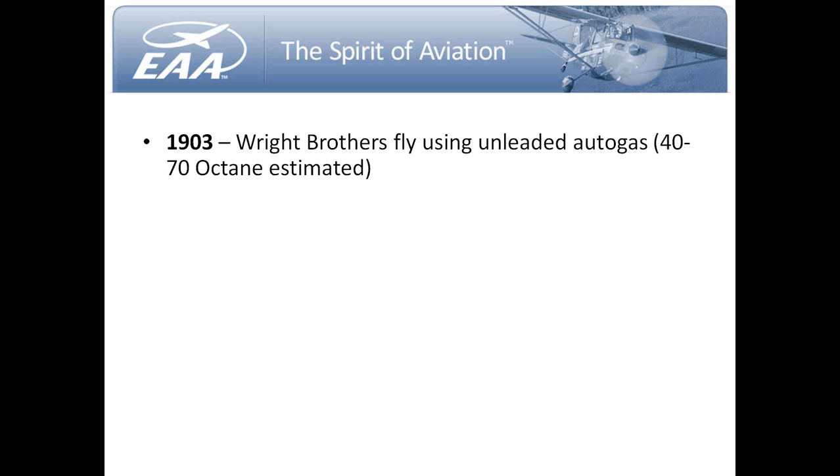And there was no such thing as an octane rating scale then. So we have to take a guess or a wag at what we think the properties of the gasoline were back then in 1903. And it was probably anywhere from a 40 to a 70 octane. But it was certainly a far cry from what we're accustomed to. As we move forward in time, 1917, the U.S. Army adopted the first aviation gasoline specification as we know it. It was a mil spec, and it was called fighting grade.

Later on in 1921, tetraethyl lead was discovered by General Motors, and that really began the transition to the type of fuels that we know today. In 1930, the U.S. Army Air Corps adopted the first leaded AvGas, and just by point of reference, that gasoline contained 3 milliliters per gallon of tetraethyl lead. And today, our 100 low lead contains about 2 milliliters. So they really weren't too far off. And that was when we began to approach the 100 octane levels that we're accustomed to today.

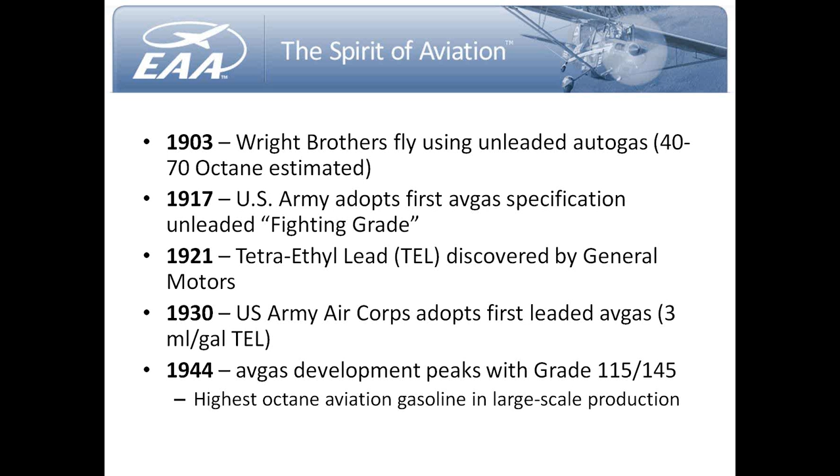Aviation gasoline reached really the pinnacle of its development toward the end of World War II in 1944 with the introduction of the 115-145 grade. This was the highest octane aviation gasoline ever produced in a large-scale sense, and really it's what allowed us to also reach the zenith of piston air-cooled engine development. So as we made our way from 1903 to 1944, 1945, as aviation gasoline progressed in its capabilities in octane, so too did that enable the development of ever higher horsepower aircraft engines. So it's very important to note that all of our engines and our technologies have been driven by advancements in fuel.

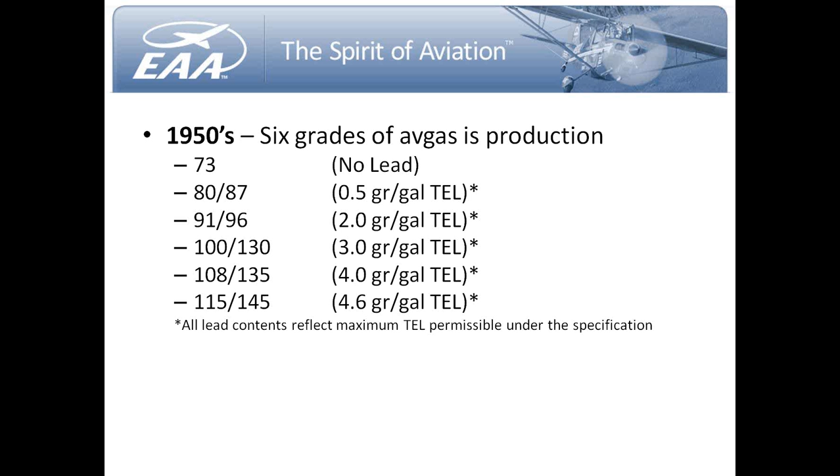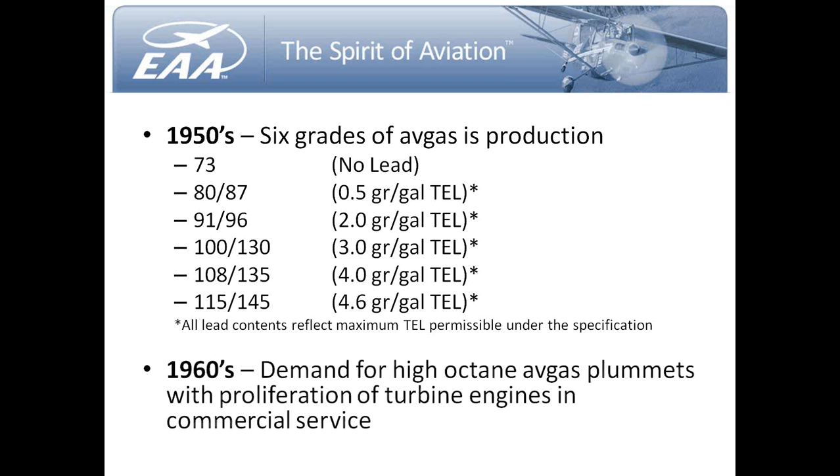By the 1960s, demand for high-octane AvGas really began to plummet, and obviously that was with the development and implementation of turbine engines in commercial service. Also coinciding with that same time frame, general aviation manufacturers of piston engines began to put out service instructions that limited the use of the highest octane, highest lead content aviation gasolines in the lower compression engines. And this was due to lead fouling of the plugs and things like valve sticking and wear. So they began to see problems with some of our lower octane, lower compression engines with these high lead content fuels.

In 1970, this was a seminal moment. The Clean Air Act was signed into law by Congress, and this was really the first time that lead became a target of environmental activity.

And clearly from that point forward, we've seen lead being eradicated from virtually all facets of life in this country and really worldwide. And of course, aviation gasoline was in the sights, but we managed to go quite a long time without any specific regulation.

In 1971, as a result of both the Clean Air Act and the troubles that we were having from a service standpoint throughout the 60s with the high lead fuels in low-octane engines, all of the highest octane grades of AvGas were consolidated down to a single AvGas we know today as 100 low lead. And as I said earlier, that contained a maximum of about 2 grams per gallon of tetraethyl lead.

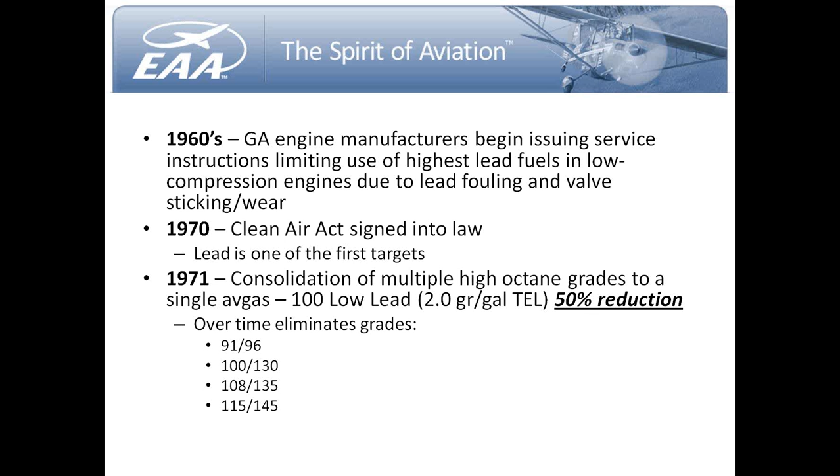This was beneficial, obviously, from a production and distribution standpoint. We were taking these multiple grades and bringing them down to one. It also had the benefit of dramatically reducing the lead emissions from general aviation aircraft by nearly 50%.

In 1974, EAA began its efforts to gain approval for the use of autogas in type certificated aircraft, and not coincidentally, that coincided with the OPEC oil embargoes. We all remember gas lines and things like that back in the early and mid-70s, and we were at that time really under the belief that we were going to lose our supply of aviation gasoline, and so the ability to tap into the broadest based, most widely available source of gasoline was very, very important strategically and economically for general aviation. So that's what really got that ball rolling.

By 1983, the first STCs were issued for 87-octane autogas, and then in 1988, the first STCs were issued for the 91-octane autogas. And then we had a watershed moment. In 1990, the EPA Clean Air Act amendments were passed by Congress. This was really the moment, the wake-up call for all of us. There was a provision in the language in the bill that would have forced the elimination of lead in all non-road vehicle fuels by 1995.

So in a very short 5-year window, we believed that we were going to lose the aviation gasoline that we had come to know. Fortunately, during the course of our activities here in Washington, to look at the congressional record and work with folks on the Hill, we were able to find a technicality, frankly, in the congressional record that made it clear that aircraft are not non-road vehicles and aircraft are regulated separately. So by virtue of something of a technicality, we were able to show that the 1995 deadline didn't specifically apply to us.

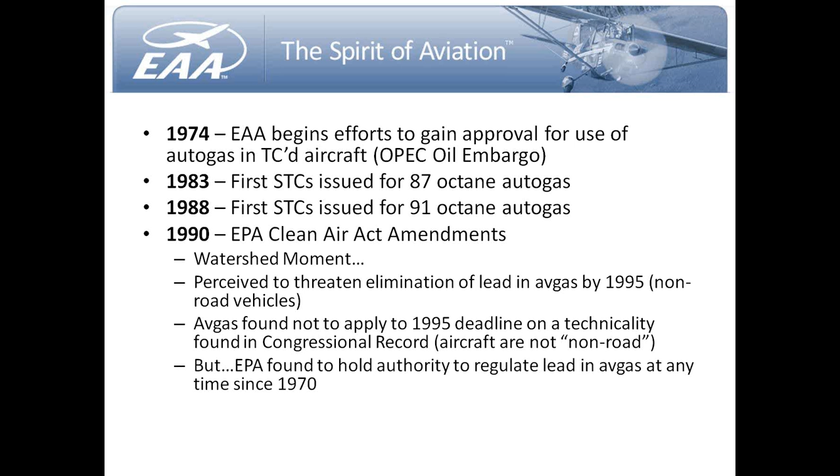However, at the same time, it became clear that the EPA had the authority to regulate lead in avgas at any time since 1970. So it was a good news, bad news story. On the one hand, we got off the hook of the immediate deadline, but the fact remained that at any moment EPA could, in fact, undertake the regulation of lead.

But that seminal moment brought us all together in what was called at the time the Fuel Crisis Conference held here in Washington, D.C. And it was really the first time that all of the parties concerned with avgas came together to discuss the lead issue specifically. And at that meeting were owners and type clubs, owners associations of type clubs, the petroleum refiners and resellers and distributors, as well as engine manufacturers and airframe manufacturers. So really all of us were in the room at the same time for the first time.

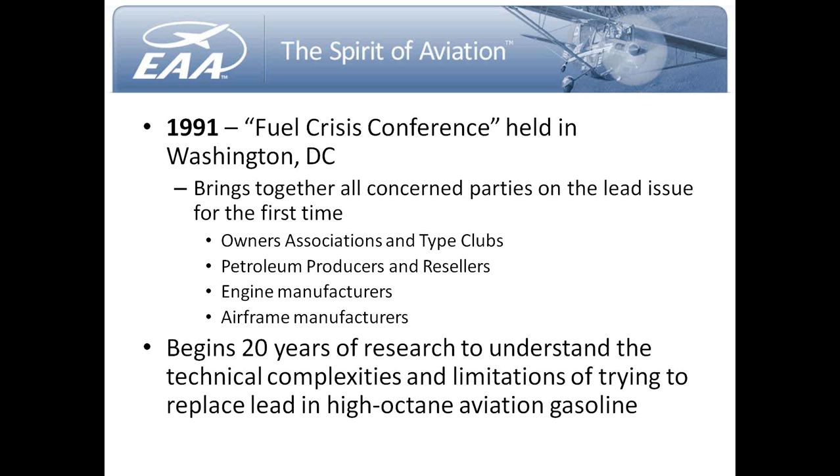And so began, frankly, 20 years of research to understand the technical complexities and the limitations of trying to replace lead in high-octane aviation gasoline. We'll talk more about that as we go along. In 1999, the 82 UL AvGas specification was passed. Now this was a 12-year effort by EAA and some folks out at Cessna to try to develop an aviation-grade aviation gasoline spec that was based on automotive gasoline base stock.

So we viewed this at the time as particularly important because autogas was changing very, very rapidly in the 90s. You were seeing lots of external pressures from environmental concerns and other interests, economic interests, making changes to the specifications. And very notably was the introduction of oxygenates and reformulated gasoline. This really called into question the Autogas STC program that we had. And we were concerned that we really weren't sure how this was going to play out.

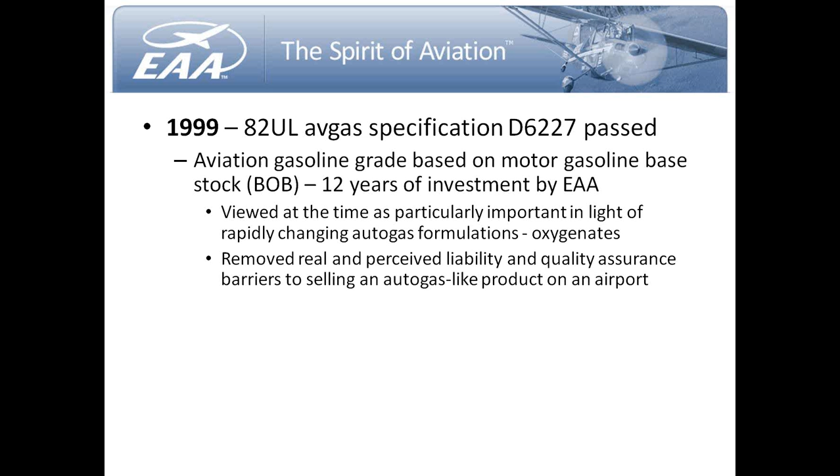So the 82 UL effort was really an effort to freeze the specification, to create an aviation-grade specification based on that massive pool of MoGas that's available out there. And at the same time, it was intended to remove many of the real and perceived concerns that have precluded autogas from being sold broadly at airports, such as liability and quality assurance and some of those things.

This was an AvGas spec, so the idea was this could potentially bring MoGas grade fuel to the airport. And of course it precluded the use of alcohols. And this spec is available today. It's been on the shelf since 1999. Unfortunately, there's been no production or distribution to date, which frankly begs a question in our minds. This is there. It's available to be used. Anybody could make a buck selling this 82UL on airports, but it's not happening.

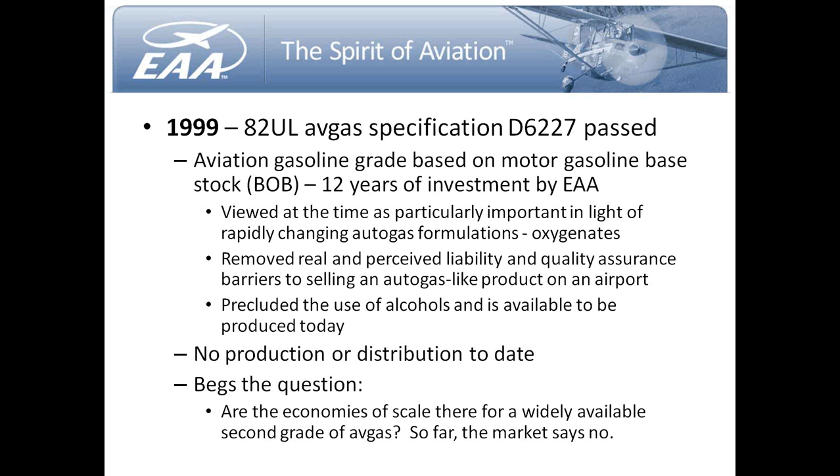So the question becomes then, are the economies of scale there for a widely distributed second grade of AvGas? So far, the market has indicated no. It is a complex issue. There's a variety of factors as to why that's the case, but the reality is we've made it technically possible to do, but the marketplace hasn't adopted it. So right now, external forces are changing virtually everything we know about piston engine aircraft fuel formulation and its availability, and that's what we're all here for tonight, of course.

So clearly, the types of fuel that we use in aviation are two. There's the 100 low-lead high-octane AvGas, and it meets the octane needs of our entire fleet of general aviation aircraft. However, it has some problems of its own. As we've talked about, there are lead fouling problems on the low compression engines, and this is a real problem for the new light sport aircraft category, almost all of which have low compression engines, but many of which also have Rotax engines, and 100 low-lead just simply isn't going to do the job for them.

The other alternative has been MoGas or Autogas. I use the terms interchangeably. In the specification world, it's referred to as MoGas. In our STCs, of course, we call it Autogas. This is a low-octane, relatively automotive gasoline. The octanes range anywhere from 87 to 91, which, when we talk about aviation octane ratings, is equivalent to roughly 82 to 87. Please note the difference there.

It's an important one. We can technically use MoGas in a large percentage of the general aviation fleet. There's no question about that. It does have, however, insufficient octane and a few other properties for some of the high-performance segment of the fleet, which is approximately 30% of the aircraft out there. But admittedly and recognizably, we can burn this fuel in a very large number of aircraft.

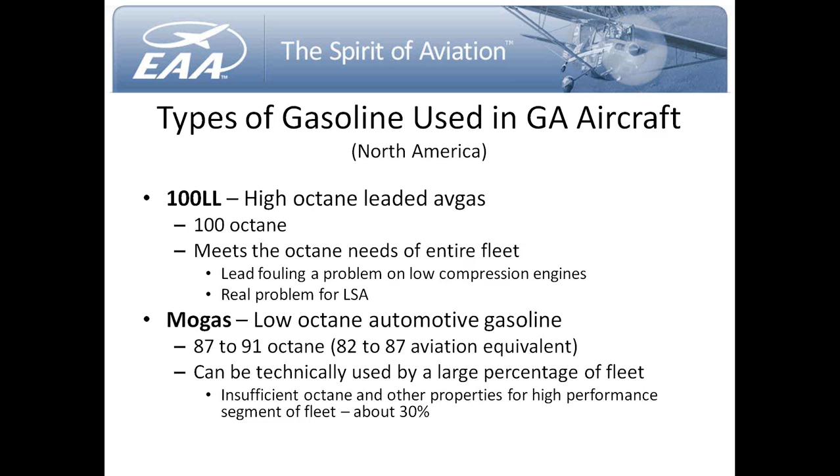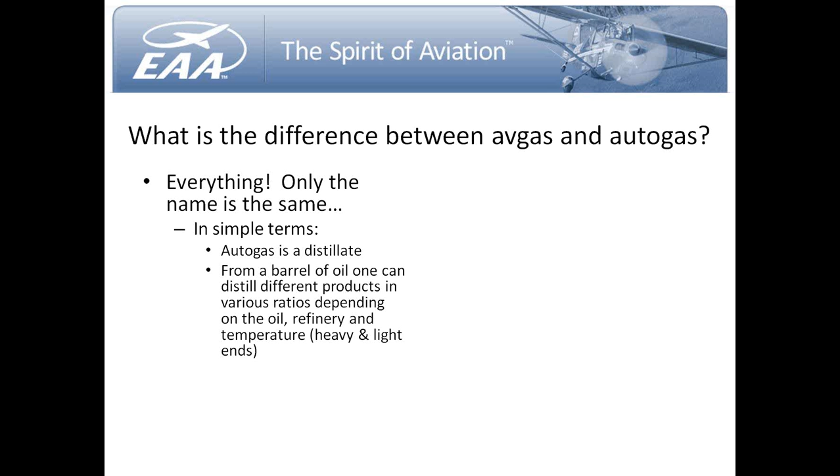So what's the difference between AvGas and Autogas? Well, frankly, everything. Only the term gasoline is the same. In simple terms, Autogas is a distillate. You can take a barrel of oil and boil off different constituents of the oil at different temperatures using different equipment and so forth, but you basically can distill out gasoline. It's a straight distillate.

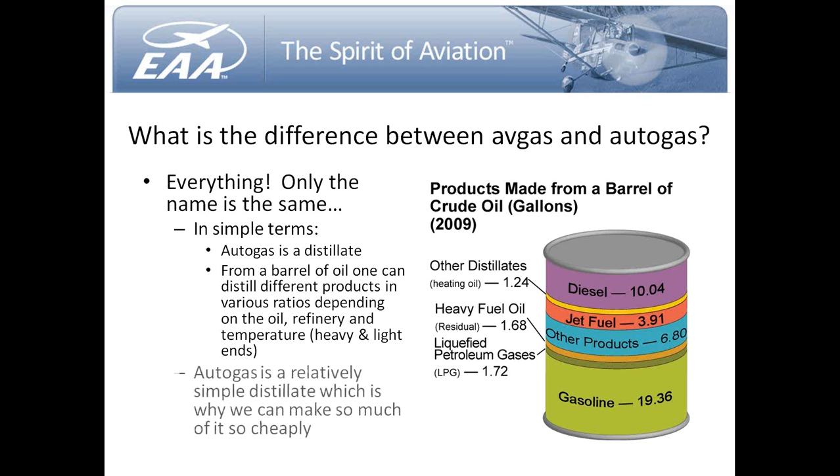So as you can see from the graphic here, if you took the proverbial barrel of oil in 2009, this graphic shows you, in terms of percentages, what portions of a barrel go to what products in North America. And as you can see from the slide, the gasoline makes up by far and away the largest portion of the nationwide annual barrel of oil per se. So that's what makes MoGas relatively simple to make, cheaply and in large quantities. It is a straight distillate.

AvGas, on the other hand, is not a distillate. It is a specialty chemical. It is a blend of specialty chemicals. And isooctane, or reformate, is the basis of it. We call it aviation alkylate. And it goes through some rather exotic processes, hydrocracking and alkylation processes and so forth that we won't go into any great detail on. But the fact of the matter is it's not something you just boil off a barrel of oil. It is a synthetic process that makes a specialty chemical.

You add to that some toluene, and you add some tetraethyl lead, and then to get the lead out of the engine as a scavenger, you throw some ethylene dibromide in, and you've got more or less a simplified version of AvGas.

So what are some of the factors that affect the sustainability of Autogas today? It is readily available.

Hey Doug, now might be a good time to ask that poll question that we had. Oh, good idea. Exactly. In fact, we had put together a couple of questions having to do with what sort of fuels you use, and this will help me as the presenter to know a little bit about you as the audience. So, Charlie, if you would put forth that first question about the types of fuel people burn today. I have already done so. So the question is, do you use Autogas?

And then the answers are yes, no, and I would if I could, meaning I know with all the ethanol laws across the country that a lot of people that might have used it in the past have given up on it.

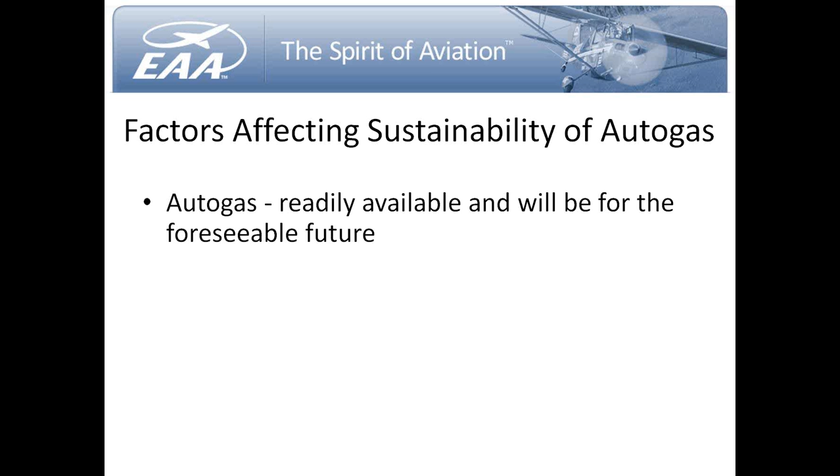However, the threats come from the continual formulation changes that are brought about by a variety of influences, including politics and economics and environmental regulation, and even, frankly, changes in automotive technology. The fuel, when you go to ASTM and look at their specification, it is made for motor vehicles, not airplanes. So the entire universe of on-road, off-road, and highway vehicle manufacturers and consumers are involved in those committees.

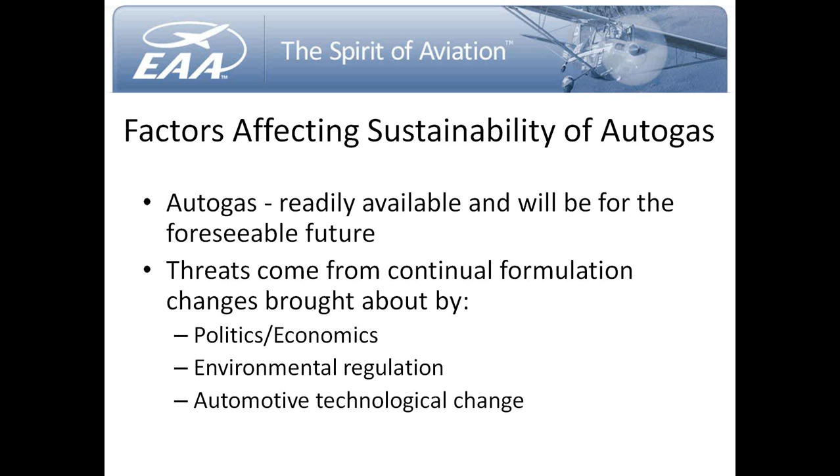And then you've got Aviation, little voice in the corner, who says, yep, me too. So we don't have a lot of influence on this product. And huge forces are at work with a huge pull, and we'll talk more about that. But as the technological changes come about in automobiles, it allows changes in the fuel. Our products are pretty static in their technology, so we can't necessarily change with some of these changes in fuel, at least not readily. And we'll talk a little bit more about that. But a bit of history here.

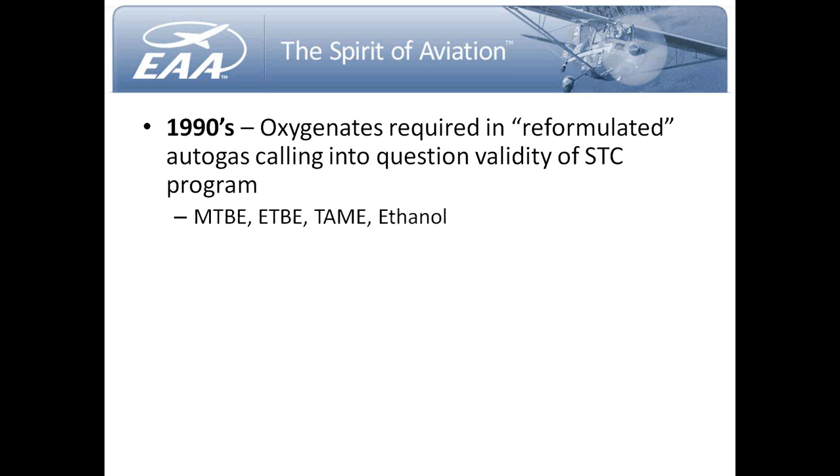As we said earlier, oxygenates were required in the 90s to reformulate the Autogas for environmental reasons, and that brought into question our STC program. These oxygenates were things like ethers, MTBE, ETBE, TAME, and then ethanol, which we all hear a lot about today. We did a lot of research back then to try to figure out whether we could get away with using these ethers and what their impact was on engine performance and materials compatibility.

And we worked very hard with FAA to get that approval, and of course today the STC program does allow the use of ethers. However, ethanol has never been a permissible constituent in any large percentage under the Autogas STC, and it remains prohibited to this day. In 1999, as I referenced earlier, the 82 UL AvGas specification came out again, the object being to freeze the spec for aviation use and not be subject to these ever-changing whims of reformulation.

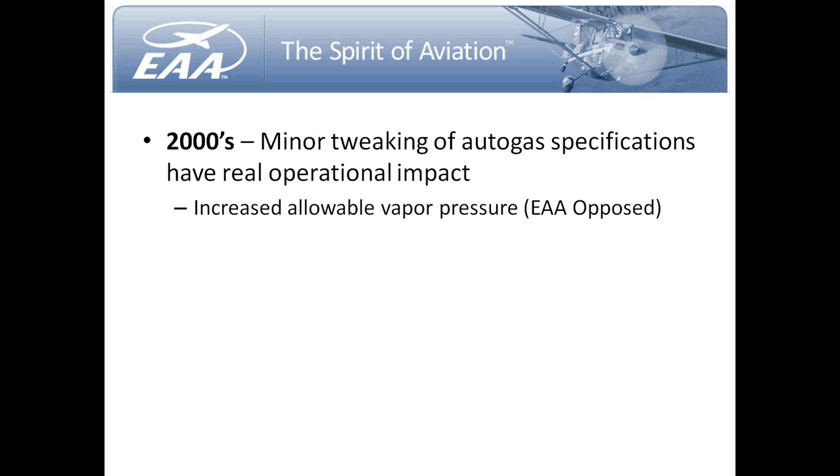Throughout the early part of this decade, we started to see a lot of tweaking of the Autogas specifications that had some real operational impact on our use as aircraft. First of all, there was a move to increase the allowable vapor pressure. For a variety of reasons, this is to the advantage of the petroleum producers, and this poses problems for us in terms of vapor lock. We opposed that at the committees at ASTM, but again, because we're a marginal user and under the spec, actually not even a permitted user of MoGas, we're sort of in the margins. Our voice was very, very small in all of that.

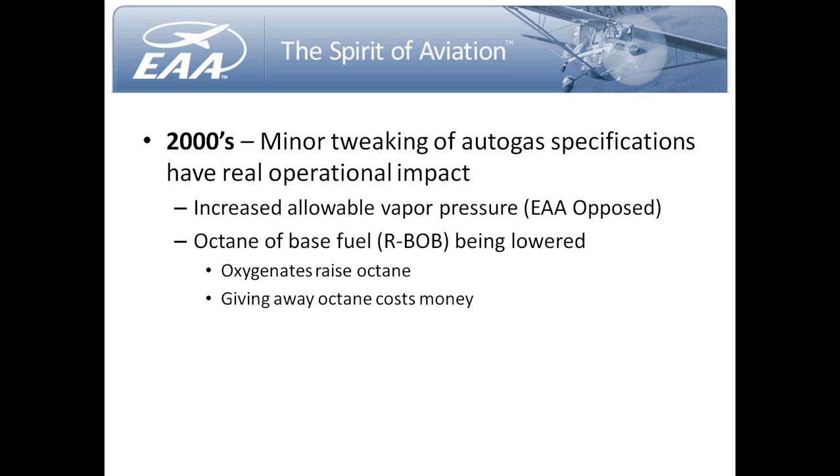One other major concern that's happening today is that the octane of the base fuel, RBOB, which is reformulated BOB, is being lowered. This is a function of the fact that oxygenates, when you add them to the fuel, raise the octane level of Autogas. And when you give away octane, it costs money. So no producer wants to give away octane for free.

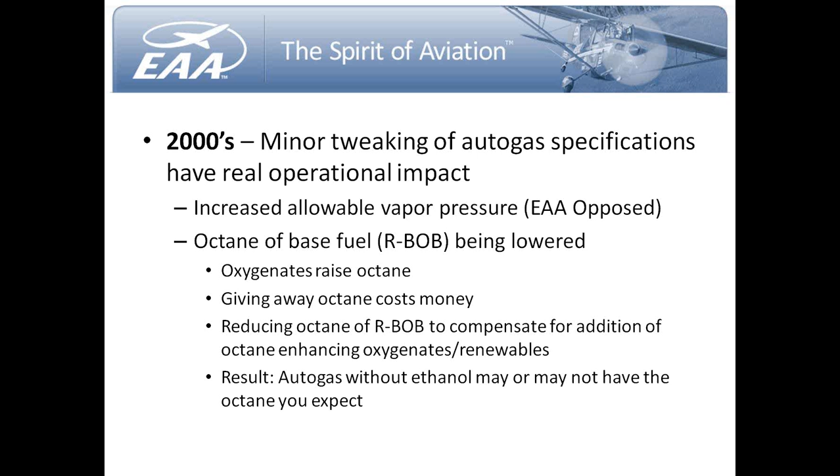So because of the octane-enhancing nature of oxygenates, they're actually setting about reducing the octane of the RBOB, or the basic Autogas, to compensate for the addition of these octane-enhancing oxygenates and renewables. So the result is that without ethanol in the fuel, you may not have the octane you think you have in the basic fuel. And I've heard recently of people washing Autogas, and I'm not sure I can tell you exactly what that means, but if it's removing the ethanol from reformulated gasoline, then what you are left with may in fact not have the octane you think it has, because they've reduced the octane qualities of the BOB.

And then the mother of all changes. In 2005, Congress mandated that ethanol nationwide be consumed in fairly large quantities under the Energy Policy Act. And that's when we really started to see the broad nationwide adoption of E10, or 10% ethanol in our autogas. And once again, this has put the STC program in jeopardy because it's become very, very difficult to find gasoline, autogas that does not have at least 10% ethanol in it.

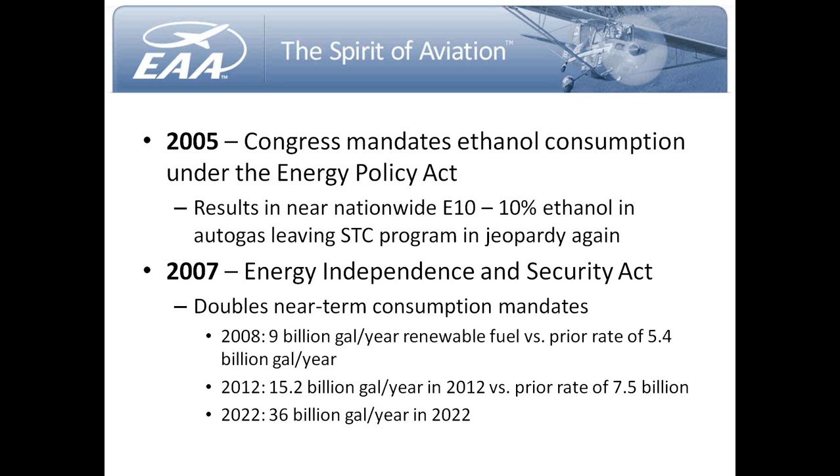And then to make matters worse, in 2007, Congress enacted the Energy Independence and Security Act, which doubled the near-term consumption mandates nationwide for renewables to 9 billion gallons a year in 2008, up to 15 billion in 2012, and 36 billion in 2022. That's all fine and dandy, except that to consume all of this ethanol and other renewables that Congress is mandating, EPA had to figure out how to get it all burned, how to use it all. So just this month, EPA issued a final rule implementing E15, which is 15% ethanol for on-road vehicles produced on or after 2007.

Now this was done in the face of opposition from EAA and everybody. We were, again, a fairly small voice in this, but the worldwide automotive and marine and off-road and non-road engine manufacturing base have all opposed E15. And yet EPA has gone forward with this mandate.

I want to make it clear that EAA has opposed the implementation of ethanol mandates at every turn. We have spent years and years fighting this at a state level before this became a nationwide issue. States were implementing these types of mandates within their own jurisdictions, and we, state legislature by state legislature, were going around the country educating them and trying to, at least, carve out the premium grade of autogas for use in aircraft unadulterated with ethanol or other oxygenates. And we've been partially successful at that on a state-by-state basis, but we were swamped and overcome by the national movement coming out of Congress.

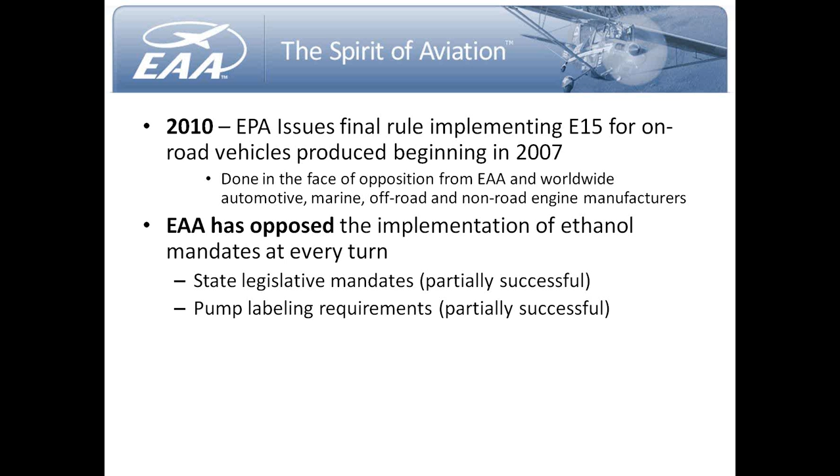Pump labeling requirements was another thing that we've had to fight state by state, because of the perceived pejorative nature of ethanol, petroleum producers don't want labeling on the pumps saying there's ethanol in the fuel. So there are always proposals coming up saying we won't have to label the ethanol content of the fuel. And we go around state by state and fight these things, and it is extremely time-consuming for us. And then along comes the congressional consumption mandates I just referenced.

And we have tried and tried talking to people on the Hill, and frankly, right now, and for the last few years, there is no political will in Congress, even by long-standing supporters of ours, of GA, to stand up and oppose ethanol. And even if they were, they'd be the lone voice in the woods. There just simply isn't that momentum or even desire or care on Capitol Hill right now to carve out an ethanol-free premium grade of autogas or even oppose the mandates outright.

And this is extremely frustrating to those of us on staff who work on your behalf because we feel your frustration and we feel your anger, and we're not insensitive or unknowing or uncaring to our own Autogas STC program and the folks who use it. So this is something that we take very much to heart. And we will continue to work on this, but we have an election coming up, things may change, but right now and in recent years, this just has not been something that we could tackle in a meaningful way.

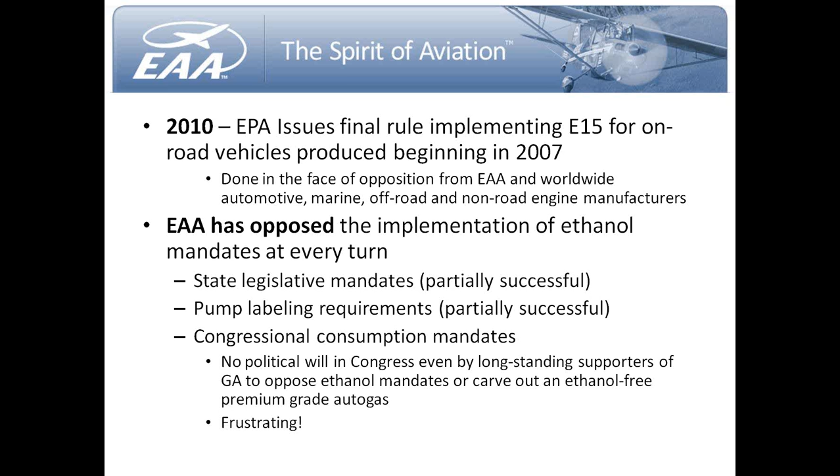Let's switch gears from autogas for a moment to 100 low lead, because there are factors affecting the long-term availability of our AvGas. First and foremost, they're economic. There's no assurance of a long-term supply of lead in AvGas. We've known that for some time. And over the last 2 decades that we've been working on trying to develop a high-octane replacement for 100 low lead, the number of producers has diminished quite dramatically. And we're down to a single producer of tetraethyl lead in the world, and that's a company called Innospec over in England.

Innospec has indicated to us as recently as this summer that they will continue to supply TEL for our AvGas as long as there's a market. They can scale down their business as world demand for lead decreases, and it is decreasing worldwide as the last automotive gasolines containing lead are being phased out. But they are committed to staying in the business. But the fact of the matter is that leaves us hanging with a sole supplier for lead for our industry, which is a concern no matter how you slice it.

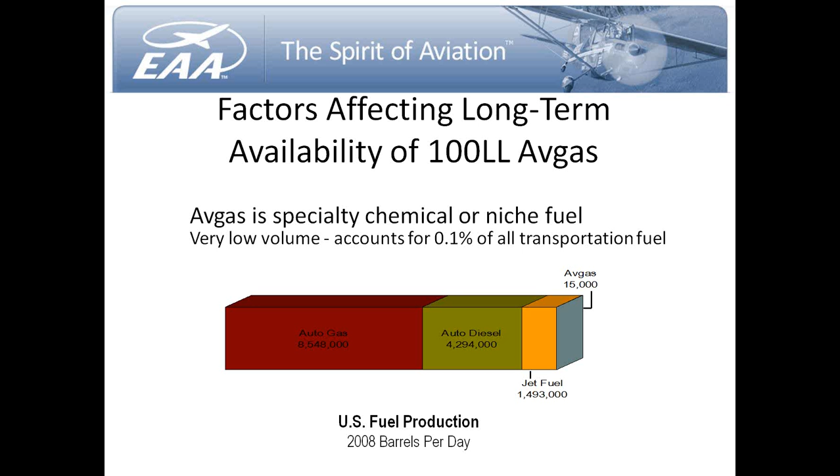Again, AvGas is a specialty chemical or a niche fuel, and as you'll see in this graphic, we consume a very, very small, very low volume of AvGas compared to other transportation fuels. And as you can see, it's 0.1% of all transportation fuel. I had to stick AvGas on the end of that bar graph because if I put it in the middle, you wouldn't see it at all.

The other thing is that our consumption continues to decrease. Now, we've had a little uptick in the last 3 years, but as you can see from this graphic, if you go back to 1983, which is the first point on this graph, we were burning, or at least I should say refiners were producing and delivering about 418,000 gallons of AvGas daily. And as you can see, that has fallen steadily to the point where this past year in 2009, the last data available, we were burning and producing 150,000 gallons a day. So it's a pretty precipitous drop.

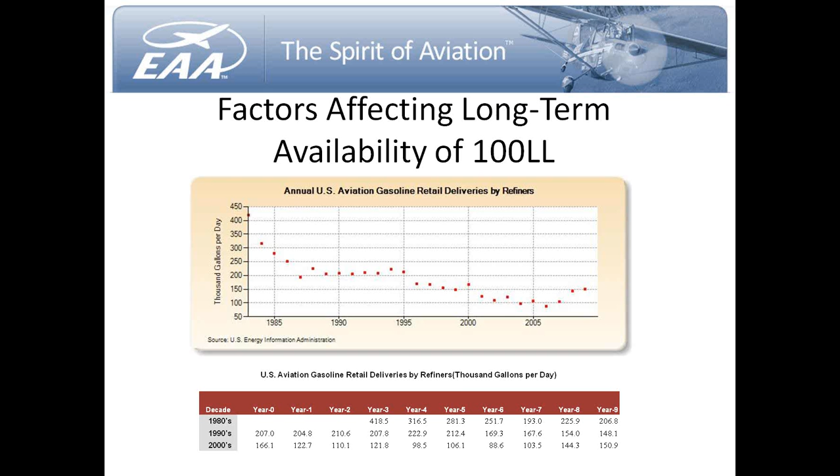Now, if you were to extrapolate that graph back in time, back to the 70s and 60s, it would be even more alarming. It really was a precipitous drop. But as you can see, we continue that downward trend, which affects the marketplace and the size of our marketplace, our influence, both economic and technical.

Other factors affecting the availability of 100 low lead over the long term is that, in 1990 when the Clean Air Act amendments were passed, we were one of the smallest sources of lead in the atmosphere. And over these succeeding 20 years, other sources have been mitigating their emissions and going by the wayside entirely, to the degree that today aviation remains as the single largest source of airborne lead emissions, and that puts us at about 45% of the total.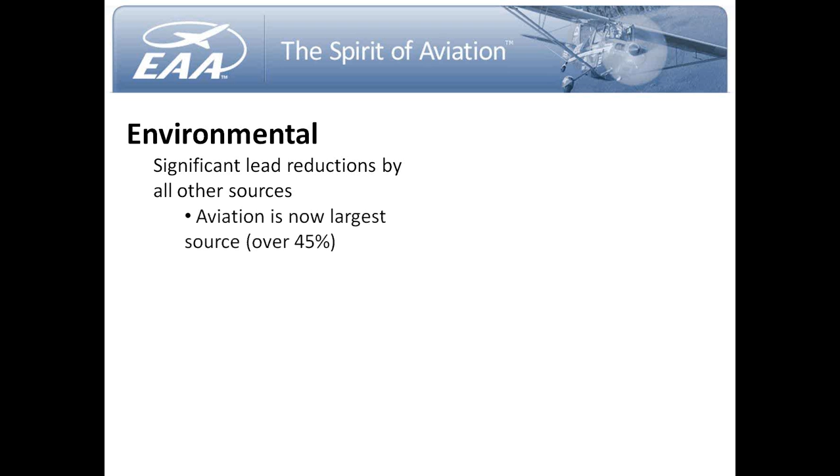So this hasn't escaped the attention of people like the Friends of the Earth and the Blue Water Network, who petitioned EPA in 2006 to basically do their job and control lead emissions under the Clean Air Act, which in fact, by court order, EPA is having to do. So we find ourselves where we are today with EPA undertaking the first signs of rulemaking that you've probably heard a lot about this year. So let's talk a bit about that.

What is this EPA regulatory action that's ongoing? And there's a couple. The first one is a near-term action that is well underway, and that was EPA reassessing and rebaselining the National Ambient Air Quality Standards, or NAAQS, for lead. This was a tenfold reduction from the previous allowable limit, so it was a very substantial drop in the permissible airborne lead content. And it subsequently required that states and their municipalities monitor near major sources of lead emissions, which of course, given the pie chart I just showed you, includes airports and major populated areas.

When that data comes in, and it is not in yet, states will then have to determine where they are in noncompliance with the NAAQS and meet that new NAAQS standard for lead by 2017. So that's about a 7-year project we're looking at here that will bring us to the point where the states have to take specific actions to come into compliance.

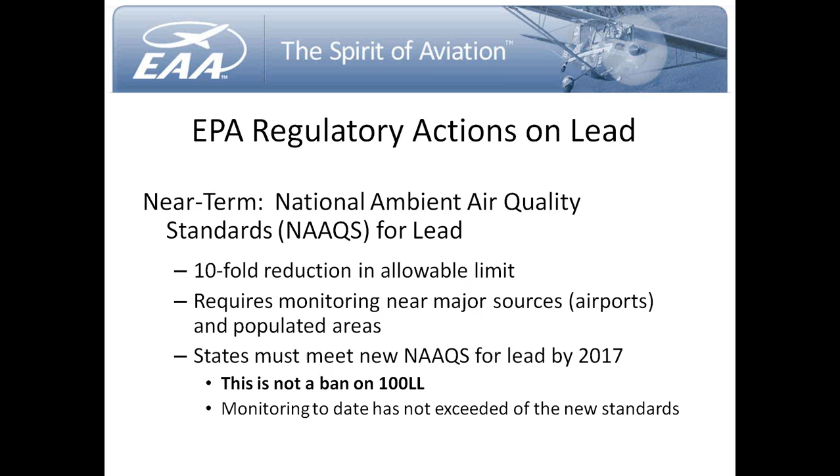Longer term, there's a secondary effort independent of the NAAQS standards that's going on, and that is the endangerment finding process, which, simply put, is: is lead a hazard to human health? Yes or no? And that's been answered yes for decades, so no question there. Is lead emitted by general aviation? Yes or no? If yes, you have an endangerment finding.

It's a pretty straightforward process, but it's not as black and white as it may seem because of all these data issues that are ongoing out there. And you'll be hearing more about that, I predict, over the next 12 to 18 months as we start to get this data in. But the good news is so far we're under the limits.

There was an advance notice of proposed rulemaking that was issued earlier this year that started this endangerment finding process. And you may recall that we sought and were given an extension to the comment period this summer, and then we and a coalition of folks involved in this that I'll talk about more later filed comments to the ANPRM before the close of the deadline period. Those comments are available if you're interested, if you haven't seen them, at eaa.org.

Now, an endangerment finding itself, again, does not ban 100 low lead. Additional rulemaking would be required to implement any mitigating strategies. So we're at the advance notice of proposed rulemaking stage today. What would happen next is EPA would issue a notice of proposed rulemaking proposing to make an endangerment finding. There would be another comment period that would be open for us to participate in. That would close, and then sometime further down the road, a final rule would be issued, either making an endangerment finding or not. So we're in the very beginning of this process.

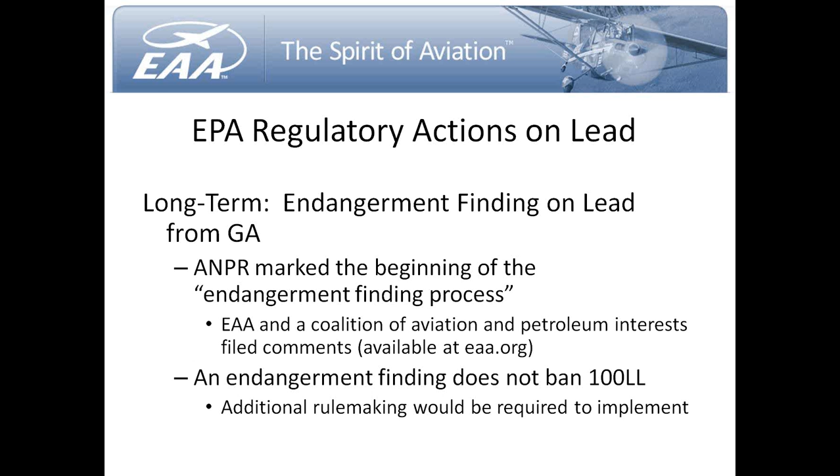If we get to the end of this process and there is an endangerment finding made, an additional set of rulemaking would be required to begin to propose, with all the attendant comment periods and so forth, how we would mitigate or reduce lead emissions from GA down the road. So what I'm trying to put forth here is that this is not an imminent crisis, as some have intimated, but it is urgent. And it is absolutely a top priority issue, and we must give it our full attention, our resources, funding, and management skills.

Rod Hightower, EAA's new president here, who just started a little over a month ago now, one of his first statements to me when coming on board was the following: fuel is one of our top priority initiatives and is one of the key aviation issues of our time, period. He made it abundantly clear that EAA's resources have to go to this issue because we live and die by this issue. Our community lives and dies by this issue. We get it, Rod gets it, and we're acting accordingly.

So what is EAA's role in all of this? What can we do? What can't we do? First and foremost, we need to ensure that the needs of the GA fleet are met. I mean, that is our fundamental mission. In doing so, we need to make sure that we balance safety, performance, economy, and availability. Without any one of those things, we don't have a viable future fuel. We need to be a sounding board and a source for technical and policy leadership.

We need to ensure that the technical bodies like ASTM, where aviation gasoline specifications are drafted and maintained, and CRC, where task-specific research is conducted, consider the needs of us, of our community, our EAA family, our pilot population out there. We need to also ensure that the regulators, such as EPA, FAA, and Congress, are sensitive to our technical, economic, and safety concerns. And we also need to ensure that funding is available by way of Congress and that oversight and coordination is provided for so that this doesn't happen in a haphazard way. It needs to be a coordinated effort moving forward. And that is today actually one of the key things that we're most engaged in.

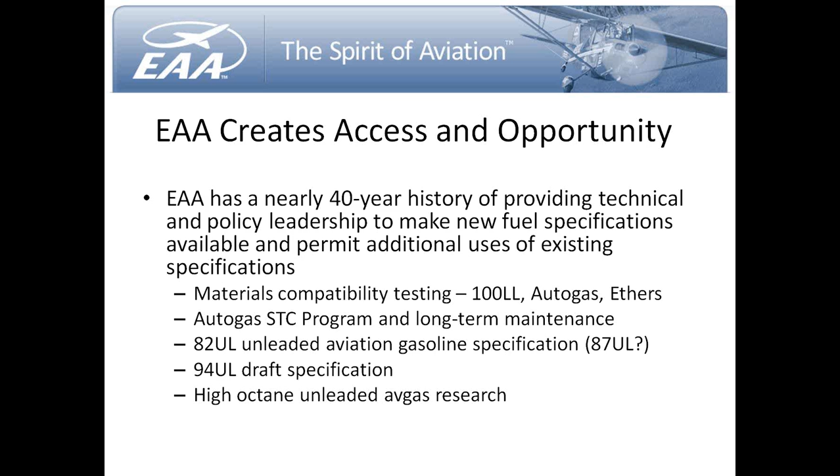You'll see we did a lot of materials compatibility testing in support of several different programs. The Autogas STC program, 82 UL, 94 UL, the high-octane unleaded research over the last 20 years. All of these things are things that EAA has been up to its eyeballs in and continues to be as we go forward. So what's happening right now?

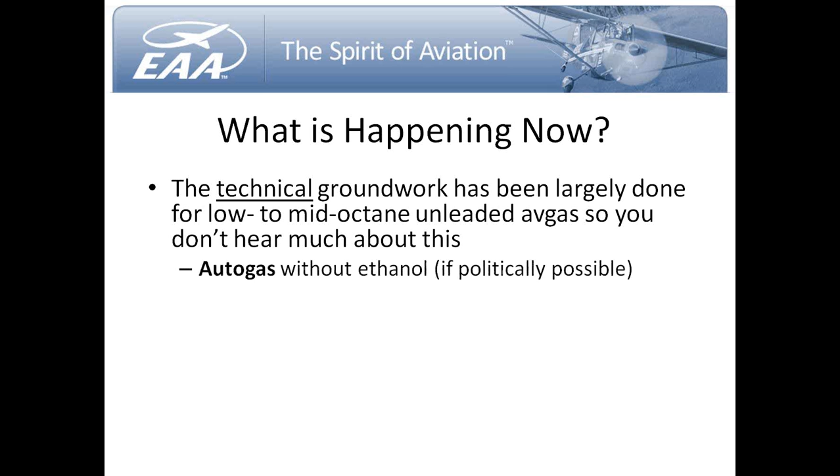Well, from a technical standpoint, really the groundwork has been done, the foundation's been laid for the low and mid-octane unleaded AvGas. We know the properties of what's available out there, and we pretty well know how to apply them. Obviously, autogas without ethanol is a desirable thing, and if it's politically possible, we're going to go there.

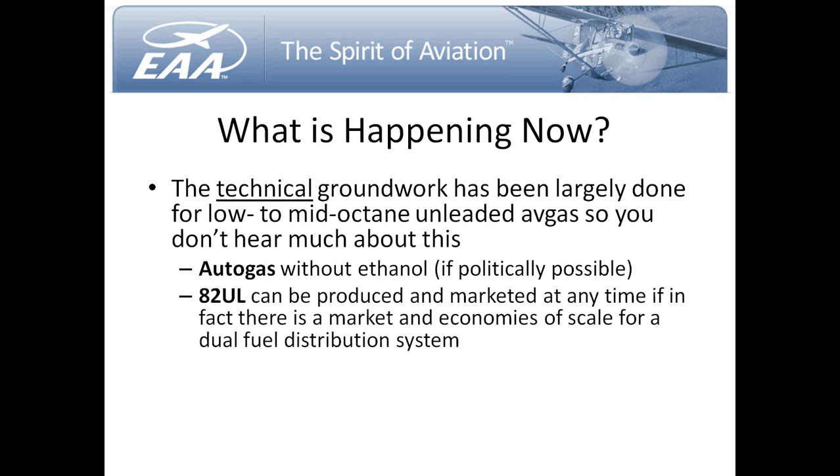82UL could be produced and marketed today without ethanol. It could be done right now if the market's there for it. And someone with an entrepreneurial spirit could stand up and make this happen. We'd be forever grateful.

We know you can produce a 91 aviation octane unleaded fuel simply by taking the lead and the benzene out of the 100 low lead AvGas we have today, just basically using aviation alkylate. The Air Force is in fact creating a specification for their piston-powered UAVs, which will be in fact a 91 UL.

So the technical focus now, and really for the last 20 years, the complexity lies in developing the high-octane unleaded replacement for 100 low lead, satisfying that high end of the fleet that we can't satisfy with a MoGas or any of the intermediate grades of unleaded aviation gasoline. So we're really looking for the highest practical octane. And while we're doing that, we have to maintain the existing safety margins we're accustomed to with 100 low lead.

Whatever fuel we produce has to be economically feasible and readily available. And most importantly, it has to be compatible, as best as we can look into our crystal ball, with the future production of petroleum in North America and really worldwide, because frankly aviation gasoline is an international product. And we have to look at this in a way that from an environmental standpoint and a production standpoint, it is sustainable.

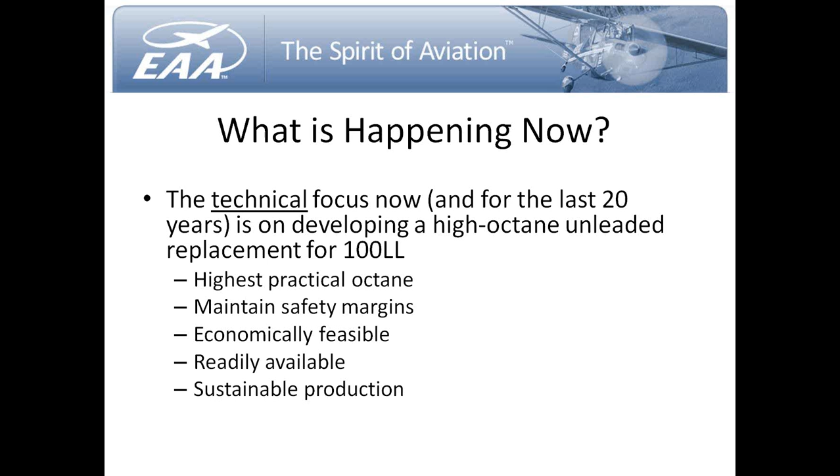Because we're going to be making decisions about certifying new aircraft that have lifespans of decades upon decades. And so we need to ensure that whatever choices we make in this process will lead us to a sustainable fuel.

Doug? Yeah, Charlie. Should we do the other poll question? This seems to be an appropriate time. Sure, let her rip. All right.

So the question is, does your aircraft require 100 octane? Pretty simple, yes, no. So if everybody could just take a second and give us your feedback on that. We're over 70%, so now that everybody's figured out how to use the poll questions, this should go pretty quick. All right, we're closing in on 90%, and I'm going to shut down the polls here momentarily. And we will share the results, and amazingly, Doug, 50-50.

50-50. Well, that actually is a somewhat higher representation for the high-octane portion of the fleet than the fleet itself would present. We estimate there to be about a 70-30 split between those that could burn an autogas-like fuel versus those that require a higher octane. And so a 50-50 split actually is weighted, at least with this audience, in favor of the high-octane burning crowd. So good opportunity to start talking about some of the research initiatives that are ongoing right now.

As you've all probably heard and read, in 2009, Swift Enterprises began to come out publicly and promote their research that they've been undertaking for a few years on an unleaded high-octane avgas. The Swift fuel is stated to exceed 100 octane, and it could potentially be derived from renewable sources. I will let them and their data do the speaking for themselves, but this is clearly one of the promising initiatives out there.

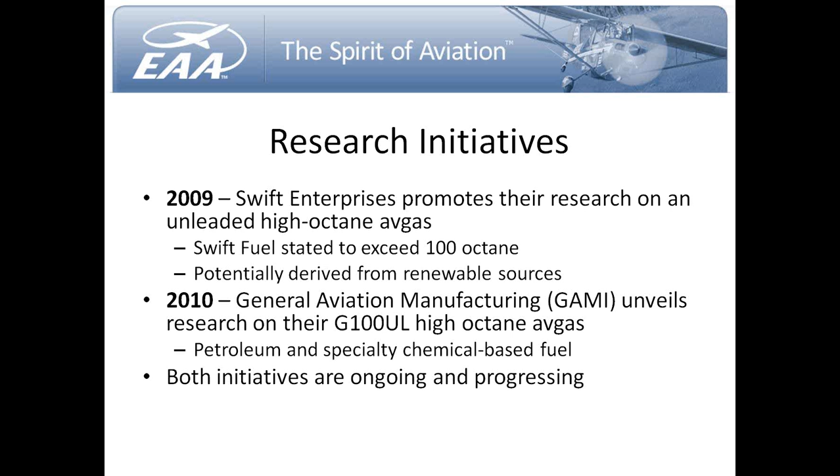Neither fuel has frozen its spec per se or its blend to say that this is the fuel we're going on. They're still tinkering and experimenting. So it is just that. It's research, and it's good work, and it's good research, and needs to be encouraged.

There is also other work being undertaken that's not necessarily happening quite so much in the public eye at some of the petroleum producers, and so there's a lot of disparate activities going on out there that are not necessarily happening in a cohesive, coordinated way. But it is good work, it is promising work, and we'll see where the data leads us as time goes by.

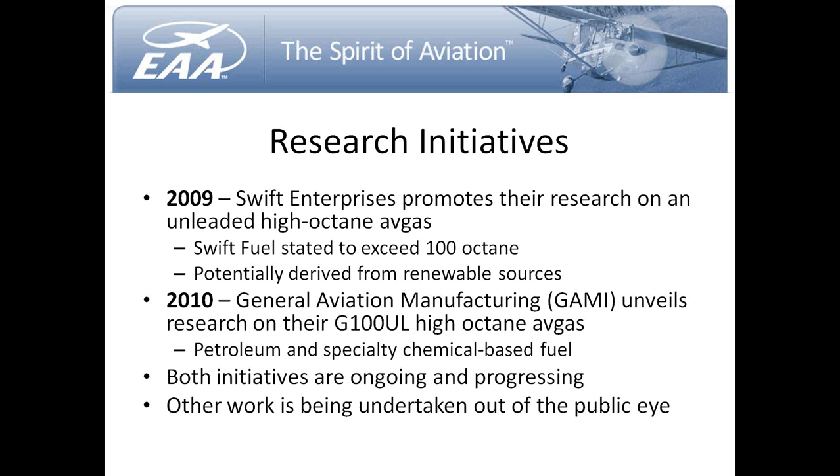Another initiative you may have heard about earlier this year, probably this summer, was the 94 UL aviation gasoline. This was an initiative undertaken by Teledyne Continental, and Cirrus subsequently announced engine and aircraft programs that would be certified to a 94 unleaded aviation gasoline. Really, this was a defensive move made by these companies to assure that they had product available going forward in the event of a precipitous ban on lead. It was really not envisioned to be the next fuel.

Unfortunately, it was erroneously interpreted by some folks and really widely trumpeted that this was where the industry was going. We were going to go to a 94 UL, and everybody with a high-octane aircraft or engine out there would be put out to pasture. And that just simply wasn't the case. I'm not even sure how that got started and got so much momentum.

But, you know, from my perspective, just as someone who's been around this a long time, what Teledyne and Cirrus were doing was just good business. It was just making a business decision that said, come hell or high water, we're going to have a product that even under a bad situation, a regulatory situation, we'll still be in business, we'll still have something to sell, we'll still be able to support our products.

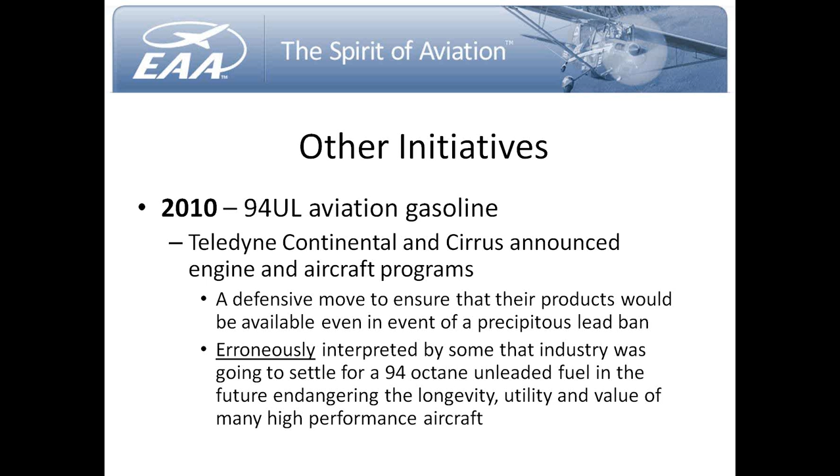It wasn't indicative that that's the direction we were going to head for the next general aviation gasoline. It was just, I think, a prudent business decision, and it really got played the wrong way. And it's really unfortunate because it was a great distraction from what really needs to be going on right now, and that's research toward a high-octane replacement for 100 low lead.

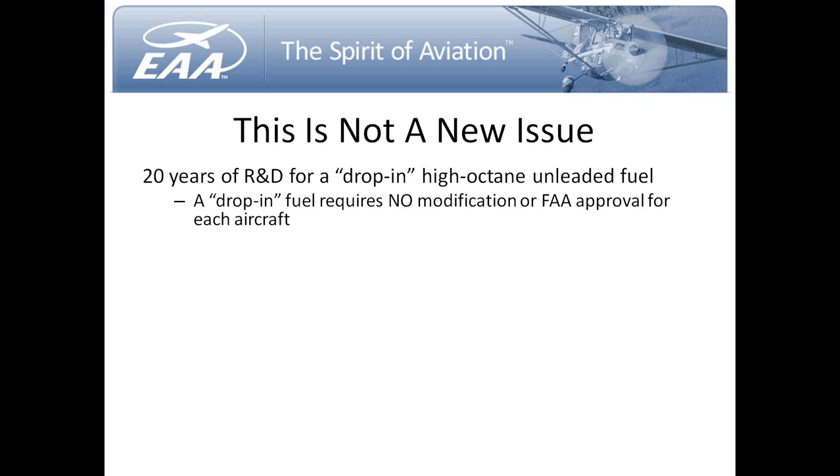So this is not a new issue. I personally have been around this for 20 years, and in that time, our goal was single-mindedly and doggedly, we will find a drop-in replacement for 100 low lead. And by drop-in, we meant it's not going to require any modifications to the aircraft or aircraft-specific FAA approval for use. In other words, we were looking for the chemical silver bullet that would allow us to take out 100 low lead and put in this new elixir, and everybody would continue on their merry way. Unfortunately, that really didn't quite pan out that way.

In the course of that 20 years, we tested more than 200 different unleaded blends. So an awful lot of ground was covered in terms of novel chemical attempts. In addition to those lab tests, we took 45 of the most promising blends and full-scale engine tested them. In the process, we gained a great deal of knowledge about how fuel behaves, both unleaded and leaded, in our engines, and about what the characteristics of the existing fleet were, because we didn't have any of that knowledge.

All we knew when we built these aircraft and certified their engines was it worked on the fuel we had. We didn't know how much the engine or aircraft really needs in terms of octane or other fuel parameters. So we'd never looked at the question the other way around. We just knew it worked, so it was okay. We didn't really know the answer to, yeah, but what does it need? So we've done an awful lot of that over the last 20 years as well to give a better understanding of the landscape of our fleet as it exists today.

The finding, unfortunately, was we couldn't find a drop-in unleaded replacement for 100 low lead. Today, even with some of the research initiatives that are underway, they don't qualify as drop-in. So really where we are today is we're looking for the next best thing. In other words, where can the physical property changes in the fuel be accommodated without significant compromise to safety or performance? What parameters that we're accustomed to having in our fuel specifications can we bend or move or change, and how much will that allow us the opportunity for more novel chemical experimentation, you might say.

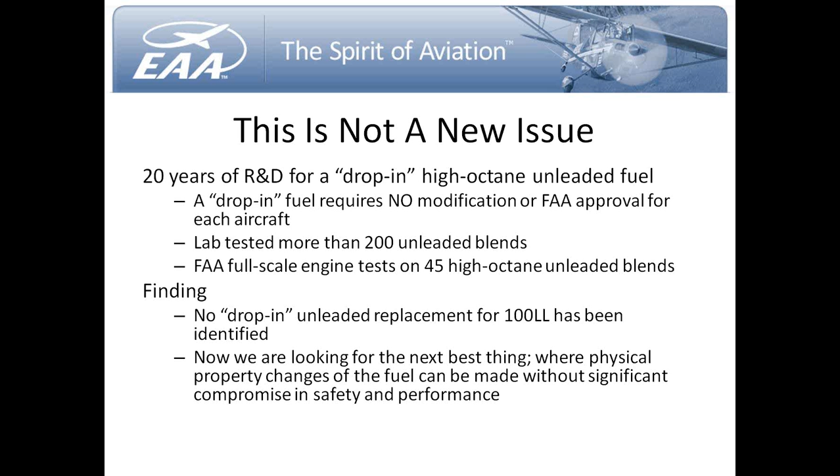So why is this so difficult? I mean, 20 years, good golly. We've had some of the best and the brightest at this for a long time, and we keep hearing it's all about octane, right? It's all about octane. And the answer is, well, yeah, sort of, but not entirely.

So let's talk very quickly about some important properties of gasoline. I'm just going to breeze over this at a very high level. If I'm talking beneath my audience, please forgive me, because we could get into very lengthy technical discussions on properties of fuel, but just a quick survey of some of them.

Obviously, octane. Absolutely right. Octane provides the knock and detonation suppression in our engines that allows the greatest possible power-to-weight ratios that we enjoy today. And without that, detonation is a destructive force in the engine that will ultimately lead to engine failure. When it comes to octane, more is better. There's no question about it.

One thing we've learned throughout this 20 years of experimentation was that there's a definite difference in behavior between some leaded versus unleaded fuels for the same given octane rating. So hypothetically, you could have two 98 octane fuels side by side, one with lead, one without. Both of them rate the same, and yet you can get a better anti-knock response from the leaded fuel. So there is something about lead that gives a greater anti-knock characteristic than the scale would indicate. There's a little extra oomph there.

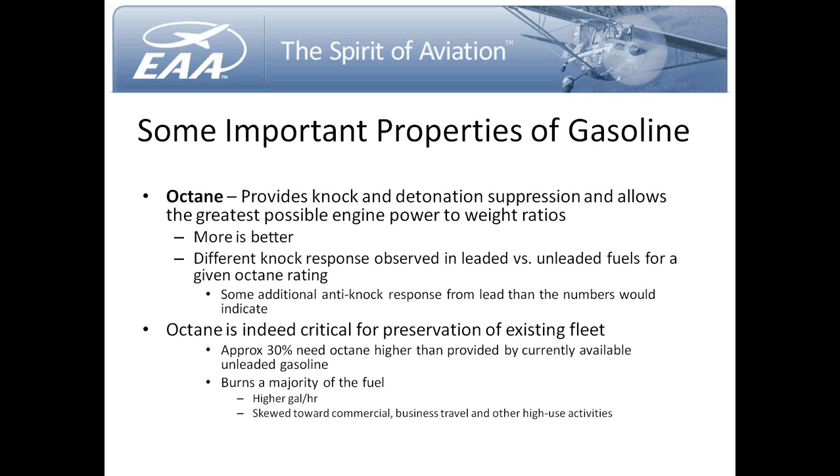And octane is, of course, critical for the preservation of the existing fleet. As we said, 30% of the fleet needs a higher octane than we could get from the currently available unleaded gasolines. And that portion of the fleet does burn a majority of the fuel. There's a great deal of debate over how much. But the fact of the matter is that relatively small percentage of the fleet is a very important economic engine for the sale and distribution of AvGas. They burn more fuel per hour, and that high performance end of the fleet is skewed toward commercial and business travel and other high-use activities.

So just a real quick primer on octane. We use the motor octane scale for AvGas. 100 low lead has a lean motor octane of 100 and a rich or supercharged rating of 130. Autogas, on the other hand, uses a different method. They use an average of the research octane number and the motor octane number, or you may have seen it on the pump as R plus M over 2. In the Autogas world they use a single lean rating, which you're accustomed to seeing every day when we fill up our cars: 87, 89, 91, sometimes 93 or 94.

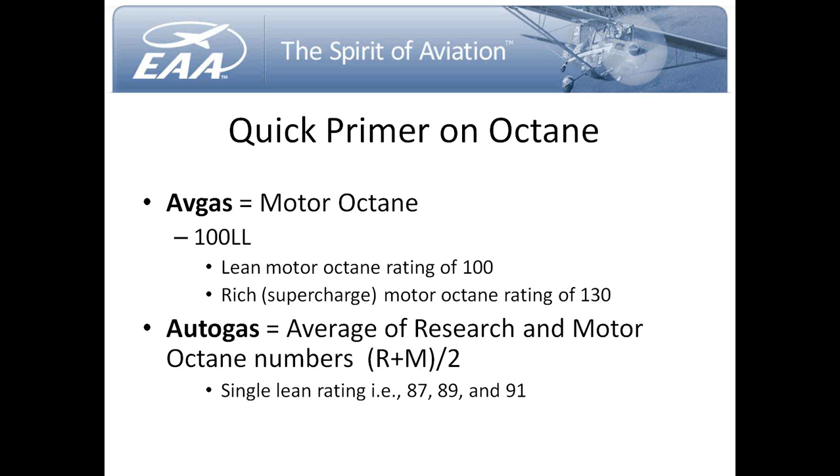So what? What does that all mean? Well, the fact that there are two different methods means that there's about a 5 to 6 point difference, depending on how you look at it, between AvGas and Autogas in terms of the scales and what it means to performance. So, for example, an 87 octane regular Autogas has what we would consider to be about an 82 octane AvGas. Similarly, a high premium Autogas, 93, would equate to roughly 87 octane AvGas.

So there's a gulf there, and that's important to understand as we talk about trying to find unleaded replacements for leaded AvGas. If we were to try to reach the equivalent of a 100 low lead using a hypothetical super blend of MoGas, it would require roughly 105, 106, maybe even more octane Autogas, which, of course, doesn't exist. But that gives you some sense of the gulf that we're trying to bridge here. So the gap between available Autogas and 100 octane AvGas is actually much greater than the numbers on the pump would lead you to believe.

Other important properties of gasoline beyond octane: water separation. We need to ensure that the water settles out of suspension in any fuel so it can be drained away when we do our pre-flights, when we sump. If it doesn't, the water can end up in the engine or elsewhere in the fuel system, causing power loss. And of course, suspended water can freeze into ice crystals and clog the fuel system and filters in any number of places, leading also to power loss or engine failure.

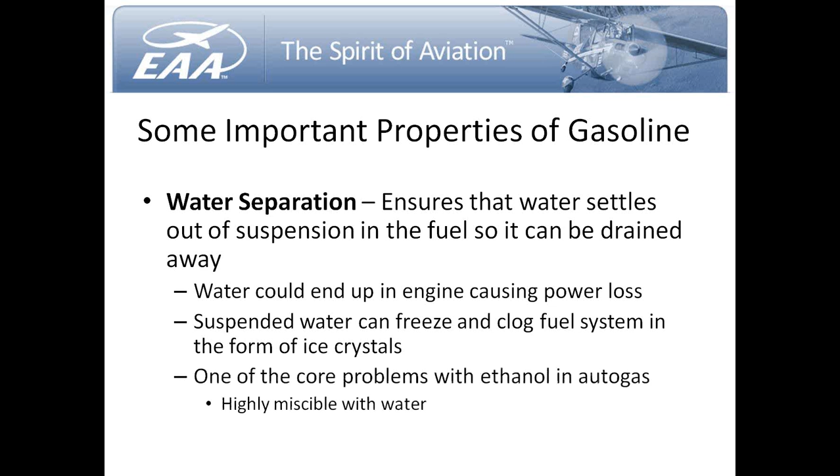And this is one of the core problems when we talk about ethanol and its use in Autogas, because ethanol is highly miscible with water. It will tend to remain in suspension and cause these very problems. So any high-octane fuel also needs to have good water separation characteristics.

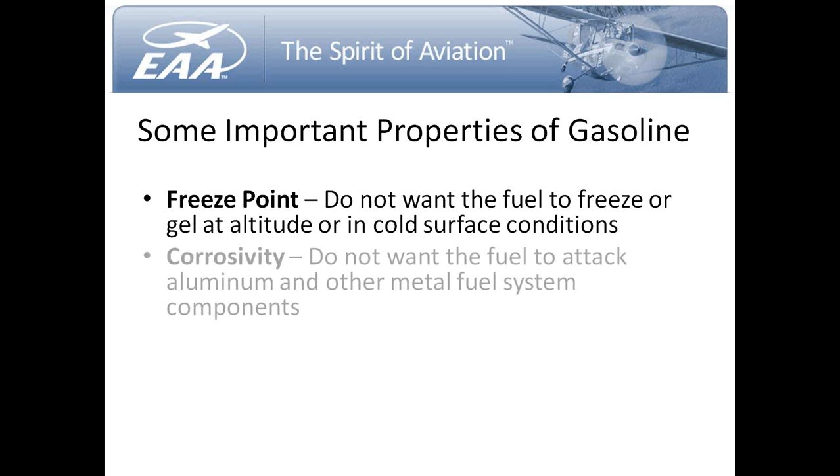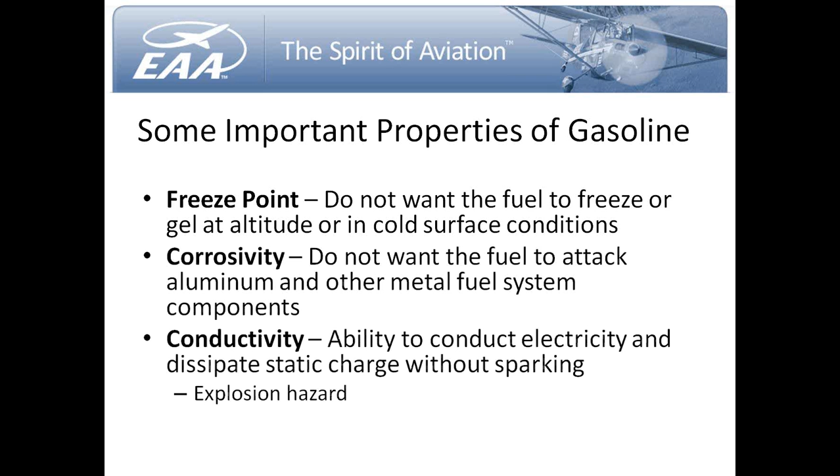Freeze point. We don't want the fuel to freeze or gel either at altitude or on the surface under extreme cold conditions. Corrosivity. We don't want it to attack the metal components of our fuel system. And conductivity. This is one that we don't think a whole lot about, but it is very important in any aviation fuel: the ability to conduct electricity and dissipate a static charge without sparking. We don't want an explosion hazard in our aircraft.

Materials compatibility of all sorts. We don't want any fuel to compromise any of the other materials in our fuel system, whether it's the fuel bladders or O-rings or seals or pump vanes or you name it, any number of non-metallic materials that we find in our aircraft. And then distillation curve.

This is a sort of a weird one that is hard to talk about without getting really techy. But it is very, very important to the discussions we're having right now, today, as it relates to the high-octane AvGas replacement process. And when we talk about the curve, it's what shows us mathematically what's in the fuel, that you have a balance of the heavy ends, the mid-boiling range, and the light aromatics that give us the range of performance and the range of environments that we can operate successfully in with aircraft.

And the reason this is important is because it contributes to things like hot start, cold start, altitude restart, and other pretty significant performance requirements. The light ends allow us to start in the cold. Heavy ends allow us to operate on hot days and not have high vapor pressures and so forth. So the curve is something that we have come to use over history through trial and error, frankly, that tells us whether we have a successful AvGas or not.

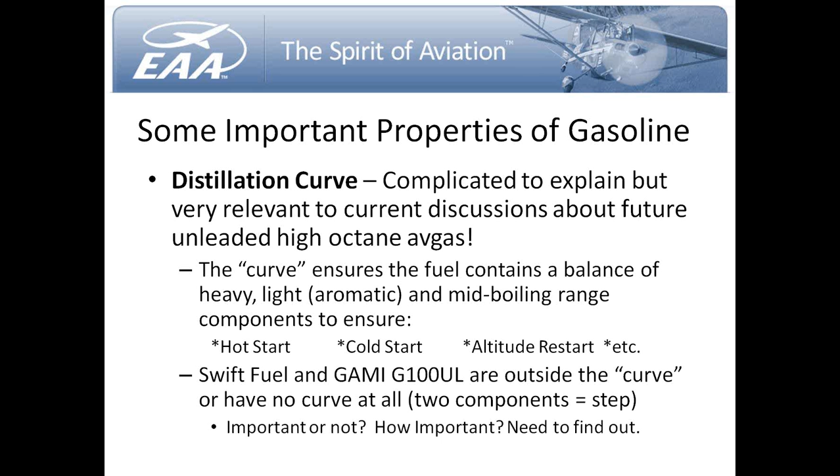So the question is, does that matter? And if it does, how important is it? And how much can we bend or move the curve? Or what can we do to mitigate the impact of some of those things? And so that's where we are right now. We're looking at some of the traditional specification criteria and seeing where we can move those, if possible, to allow for greater creativity in some of these novel research activities.

Another one is volatility and vapor pressure. Vapor pressure, or volatility, simply is the tendency of a liquid to change to a vapor state. And this is important because we don't want vapor lock. Lower is better when it comes to vapor lock and vapor pressure. If you go too low, you don't have enough aromatics in the fuel to start the engine on a cold day, so it's a balancing act.

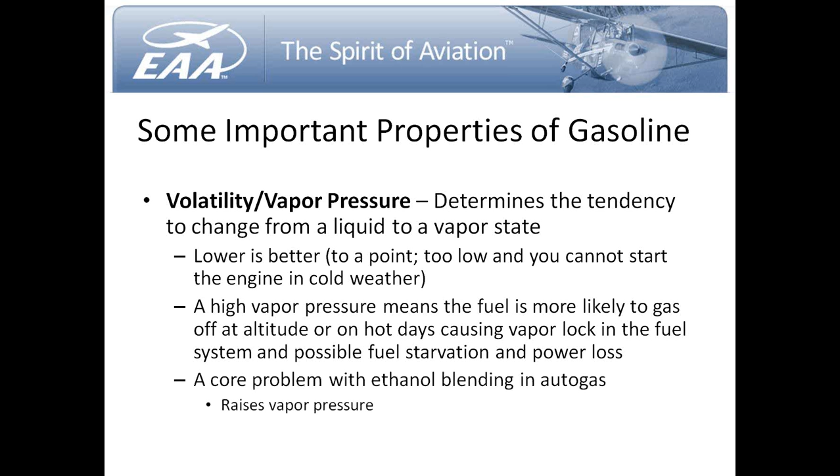But a high vapor pressure fundamentally means that the fuel is more likely to gas off. You're more likely to get a vapor bubble in your fuel system that will starve the engine for fuel. This, again, is another core problem when we talk about ethanol blending in autogas, because ethanol raises the vapor pressure of the fuel quite dramatically and unacceptably.

So as we look to the path forward, we talked a lot about where we've been and where we are. One thing that has been clear to all of us, I think, in the industry is that we can't do this alone. It has to be a collaborative effort. We have to arrive at this end place more or less together. The marketplace has to determine what the best outcome is going to be.

EAA, for example, we could come up with what we think is the best fuel for the future of general aviation ourselves and say, this is it. But if we don't have the buy-in of the engine manufacturers and the airframe manufacturers and the FAA and the marketplace's confidence, it's not going to come to pass. So no one can do this alone. And ultimately, consensus and the marketplace will drive us to the solution.

So let's talk a little bit about some of the people that are involved in all of this, because there's a cast of thousands, which makes this very complicated. Obviously, the government. Congress sets the environmental goals to be attained, and they also control things like funding and level of priority for any given issue. So we have to work with Congress. We have to have their buy-in.

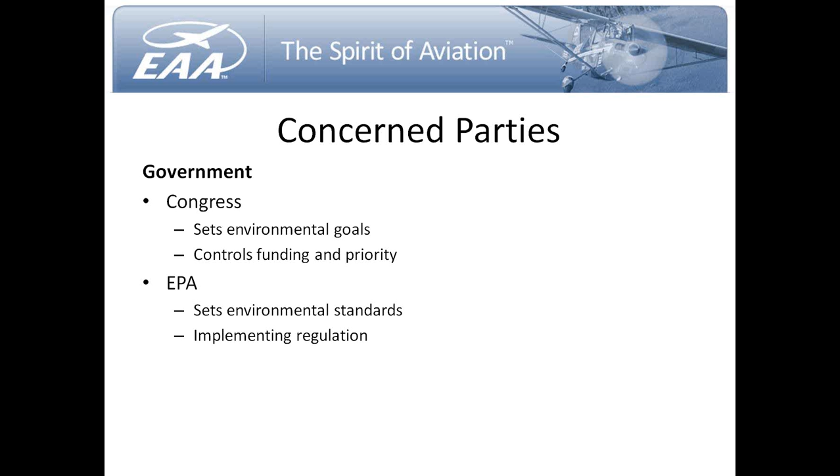We have to have their cooperation. EPA sets the environmental standards to attain the goals set by Congress. They also set the implementing regulation, that is to say, mitigating actions, restrictions, what have you. That will come down the road, as we discussed earlier, but they play an important role because managing their expectations along the way is critical.

FAA plays, obviously, a critical role in this. They set the safety standards for our aircraft, and ultimately they approve the use of any given fuel in our engines and our aircraft. So while they don't approve fuels per se, they approve the use of fuels. So they play an absolutely integral part in this as we make our way forward.

In industry, obviously we have the petroleum producers, we have distributors and retailers, engine manufacturers, aircraft manufacturers, ourselves, the consumers, whether it's owner groups, type clubs, individuals. And then we're all sort of bound together under this umbrella at ASTM. ASTM doesn't write fuel specs, but they give us the forum and the process, the protocols for coming together and developing fuel specifications and maintaining those specifications over time. So they play an integral part in all of this.

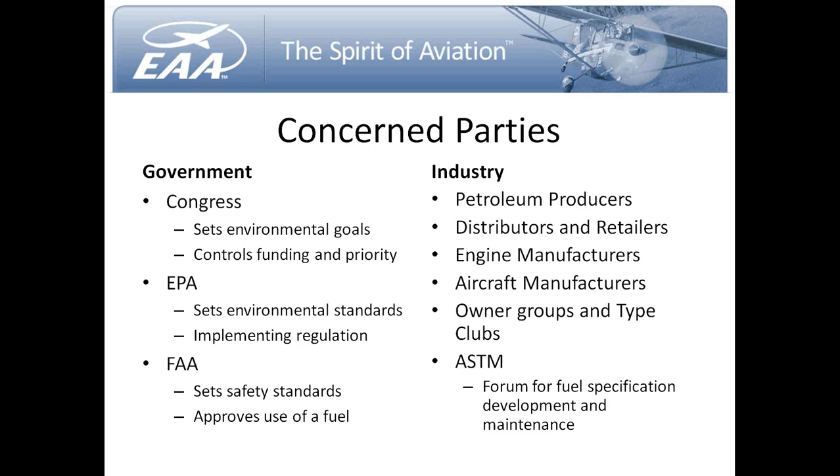So realizing that none of us, whether it's AOPA or EAA or Exxon or pick any entity out there, none of us on our own can come up with the solution. We have to work together. So earlier this year we put together what's been called the AvGas Coalition, which you may have heard about. And the purpose of this group was to collaborate, coordinate, and provide leadership on the development and implementation of the process. And I've underlined and italicized the process.

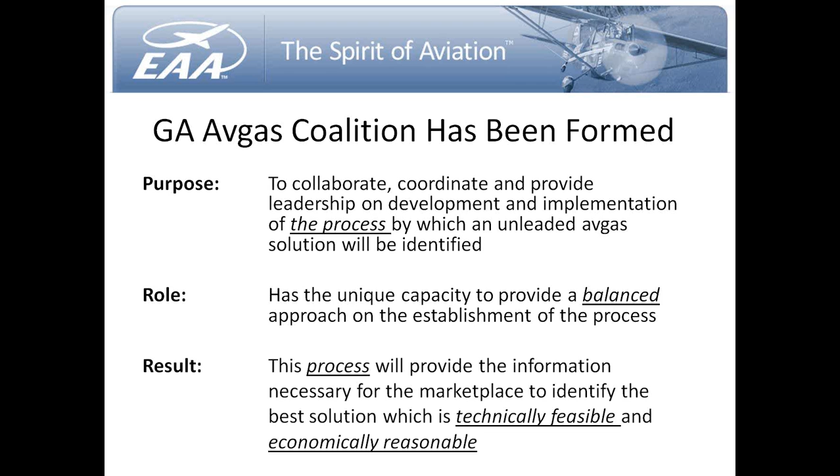We're not creating and choosing fuels. We are putting forth a process that will allow this activity to happen in a cohesive way to develop the unleaded AvGas solution. And our role is unique in the sense that it can provide a balanced approach because everybody's at the table. All of the sometimes competing, sometimes complementary interests are there. And the result will be the process. We're not trying to create the fuel, but the process that will allow the marketplace, which ultimately is us as pilots and aircraft owners, to arrive and identify the best possible solution that is technically feasible and economically reasonable.

The members of the AvGas coalition will sound pretty familiar to you. There's the aircraft owner groups like AOPA, EAA, and NBAA. The aircraft manufacturers are represented by GAMA, but many of their member companies work directly with us, of course. And then there's the fixed base operators, the points of sale, represented by NATA, and then very, very importantly, the AvGas producers are at the table, and not just individual companies, but their representative organizations, American Petroleum Institute and the National Petrochemical and Refiners Association.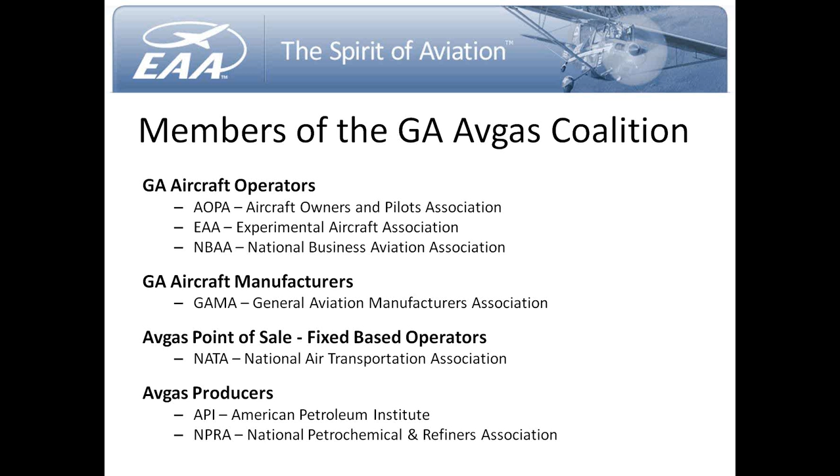This is very, very important because when we're dealing with the petroleum industry, antitrust comes into play a great deal, and we can't necessarily talk in the open with multiple petroleum companies in the room about things like producibility and economics, but through their overarching associations, if you will, some of that can occur.

So the goal of the coalition is this: to establish a process to identify the most viable unleaded solution to replace 100 low lead, taking into account aviation safety, environmental improvements, technical feasibility, aircraft operability, economic impact, and the ability to produce and distribute at a reasonable cost.

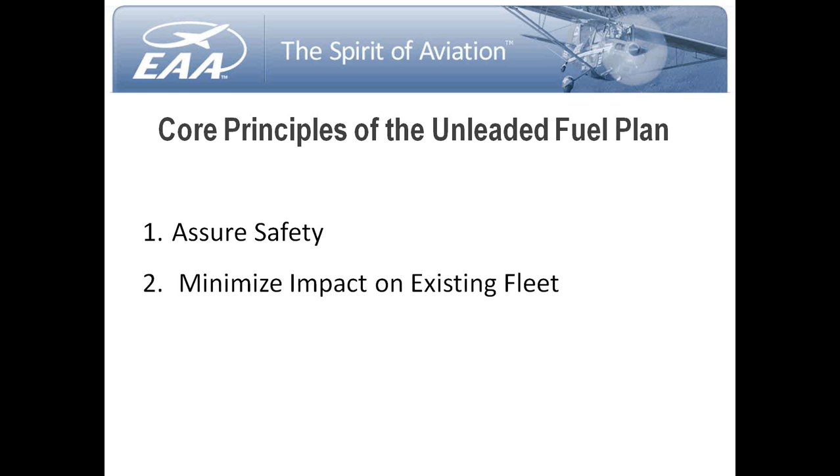As our guiding principles, we have to assure safety. Nothing can happen if it compromises safety, and that includes banning lead. If we don't have a safe alternative, we can't go there, and that is the message we consistently deliver to EPA on this. We have to minimize the impact on the existing fleet, because let's face it, the existing fleet is the fleet we're going to have. We will build new aircraft, but not in the numbers necessary to replace the existing fleet. It is the fleet we have. And then we have to do this in a way that will ensure the sustainability of growth of GA in the long term.

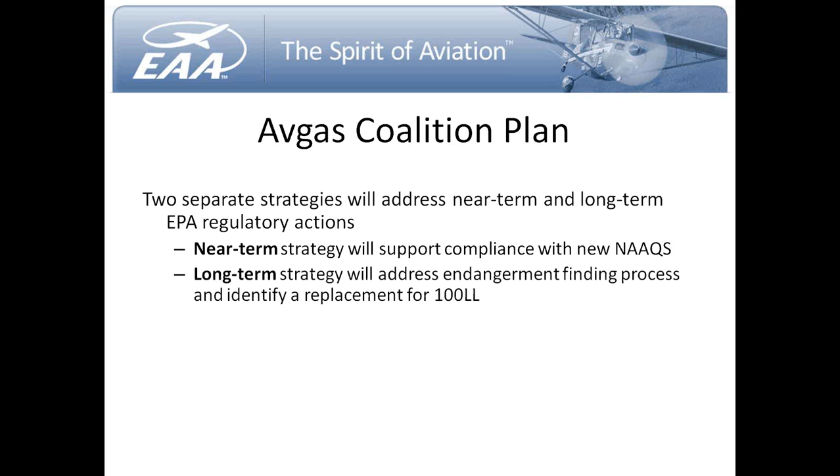So what is this plan? Well, there's two separate strategies to address the near and the long-term EPA actions we talked about earlier. Remember that in the short term, we were talking about the National Ambient Air Quality Standard changes and the tenfold reduction in the permissible levels of lead. That's near term. We have that to confront in the immediate years in front of us. So the first part of the plan goes after that. The second part addresses the longer term endangerment finding process, which I described earlier, and which leads us to the need over the long haul to identify a replacement for 100 low lead. So we've broken this down into hopefully manageable pieces.

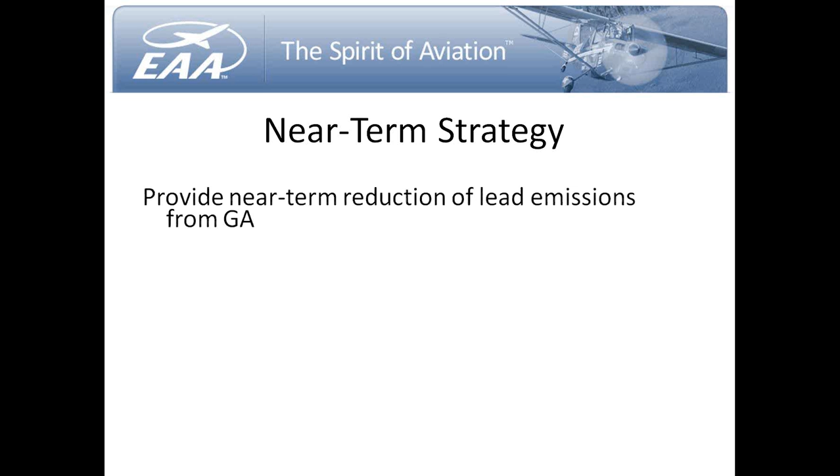So the near term strategy is to try to provide some reductions in lead emissions from GA up front. And we're doing that in a way that will create what we hope will be a very low lead 100 octane AvGas, or 100 VLL is the working term we're using today. This is again intended to be drop-in, and remember I said drop-in means no modifications, no aircraft specific approvals from FAA. And what we're trying to achieve here is about a 20% reduction in lead from the maximum permissible content under the specifications today. We think we can do that. Whether it's 15, 20, we're not there yet.

We've just, in fact, completed a research report, which is being validated at ASTM right now, to begin to build the technical case for this reduction. But the purpose of this is to do it in a transparent way and to basically show in good faith an overall lowered total lead emissions nationwide, and then also to help address any of the potential problems we might have at airport-specific monitoring sites that are found not to be in compliance with the NAAQS.

So we're trying to get ahead of this thing because it takes years to make even relatively small leaps like this. It sounds so simple, but before we get all of the data and go through the approval processes and the specification processes and ensure ultimately that it's safe for our use, it's not an overnight process. So we need to be doing this now, even though the implementation may be 2017. So we're trying to get ahead of this.

The longer term strategy is the one that we've all kind of been more focused on, and that is dealing with the long-term replacement for 100 low lead. First and foremost, FAA, I think, coming into this program felt that they just had sort of a backseat role. Industry, y'all go out and you'll create the fuel, you'll find a fuel that works, and then we'll approve it. We need them every step of the way in this process.

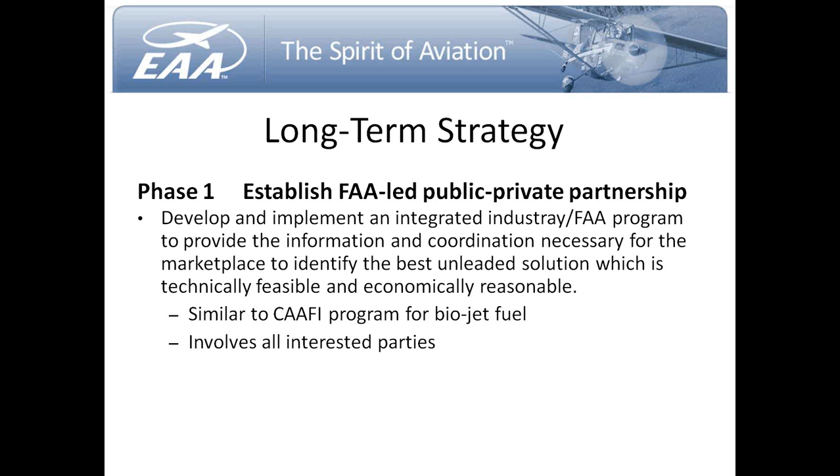We're envisioning this partnership to look something like the CAAFI program that was used for the biojet fuel research and development in recent years. And that's the model. We're not looking to replicate it exactly because we have some much more complicated issues we're trying to address, both in terms of technical and programmatic. But it was a pretty successful model for bringing everybody under the same umbrella and managing the process. So we're looking at that, and the important thing is it involves all the interested parties.

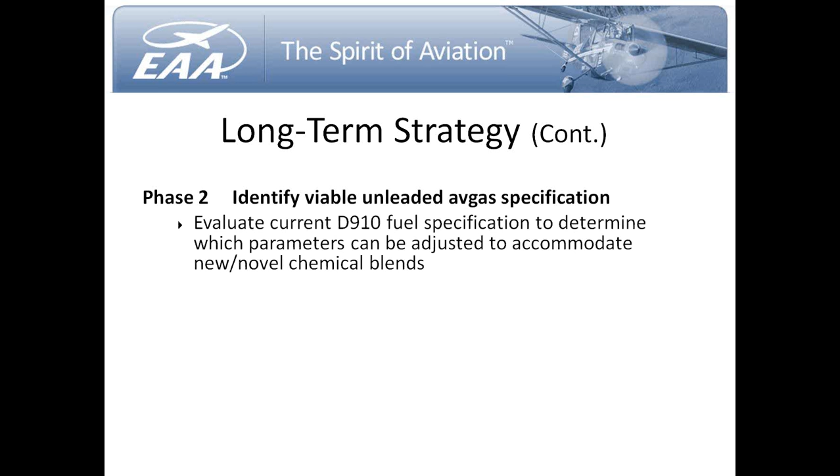First steps, once that's put together, is to identify those areas of the existing fuel specifications that can be adjusted to accommodate some of these new and novel chemical blends. We talked about distillation curve. That's just one of the many that we need to look at. And as we identify those, we need to then be able to enable the research and fund the research so that we can evaluate the operational impact of these changes and determine what's an appropriate level or an acceptable level or not.

Once we've gone through that iterative process, we will then be able to define the criteria for a viable unleaded AvGas. In other words, you'll have the envelope in which you can work. And hopefully it's a bigger envelope than the one we have today with the specification for 100 low lead. And so once you have that envelope, you can begin to assess the candidate fuels, the things that are being worked on out there, against that data and say, is this acceptable? Will it work? Won't it work? And you can begin to separate the wheat from the chaff, so to speak.

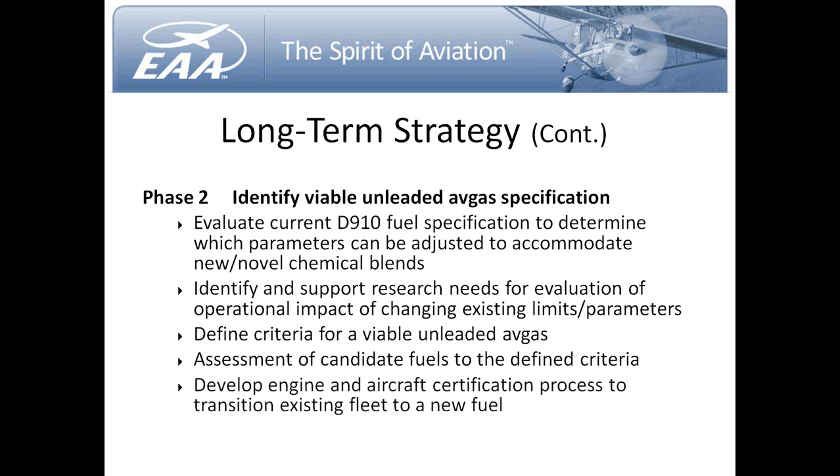And then once you're down to that level, we need to develop an engine and aircraft certification process that will transition the existing fleet to the new fuel. I skipped over that pretty quickly, but that is an immensely complicated process, but one that would take up the rest of the evening if we were to dwell on it for very long. Phase 3 is to develop and approve an ASTM fuel specification once we have that universe narrowed down to what's the fuel going to look like.

And then, ultimately, we have to certify, as a first step, new production aircraft to the new fuel. That's the easiest. Produce new products that will accept the new fuel. And you go after that one first. And you set a deadline that says after X year, new production aircraft will only be able to burn this unleaded fuel.

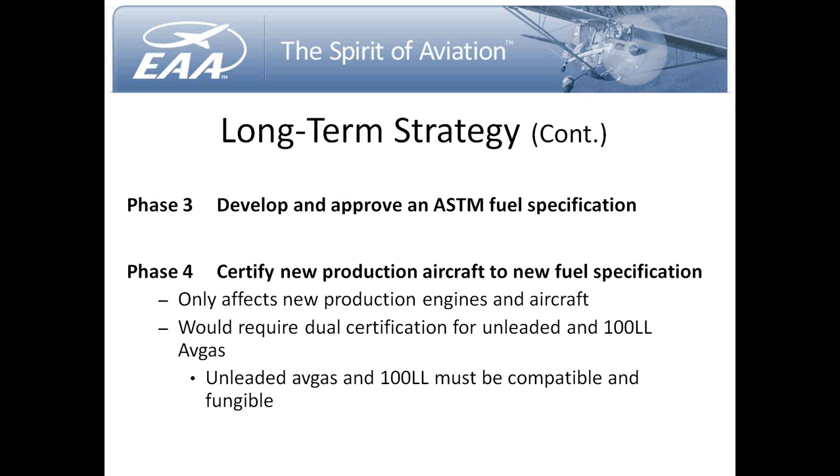The key to success with that is that whatever the new fuel is has to also be compatible with and fungible with 100 low lead, because as we begin to transition this, you could go to one airport and all you can find is 100 low lead. You can go to another airport and all you'll find is this new unleaded fuel, and you'll have half a tank of each. Well, you need to be able to successfully meld them together and use them blended in any ratio between the two. So that is one of the keys to success in this.

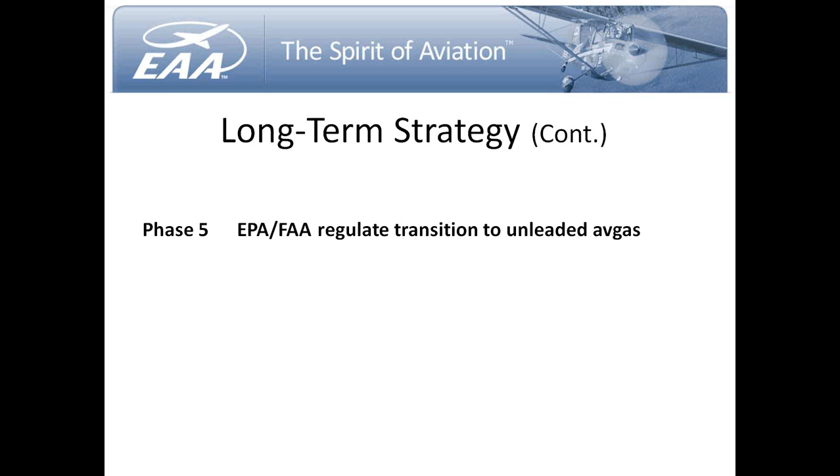And then ultimately, once we arrive at this next unleaded fuel and we are producing new aircraft and engines to the new fuel, we have to then go back and regulate a transition of the existing fleet. Let's face it, unless there's a regulatory end date, there's no incentive to produce anything but 100 low lead. It's the cheapest thing we're likely to find. We know it works. Why would we stop? So at some point in this process, there will have to be an end date, whether that's 5, 10, 15, 25, 50 years. I have no preconceived notions, but at some point there has to be a deadline.

The transition timeline will be dependent upon how radically different the fuel is from what we have today. The more different it is, the more complicated the things like FAA approvals and certifications become. And the more different it is, the more difficult the impact it might be on the production and distribution infrastructure for the fuel itself. So the transition really is going to be very, very dependent upon where all of this data leads us over time. So it's hard to preconceive what that's going to look like.

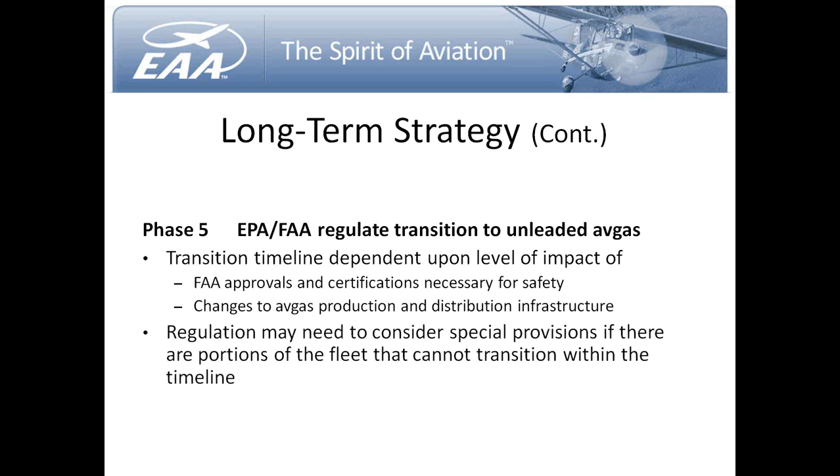But no matter what, the regulation will need to consider any special provisions for those segments of the fleet that may not be able to transition successfully or within the timeline. So there have to be sort of off-ramps for those considerations.

So what's EAA doing today? Well, first and foremost, we maintain a relationship with the EPA, and we have for years and years, which is one reason we haven't had regulation before now. I would say the height of advocacy success is to have gone from 1990 to 2010 and not having to have a specific worry about our AvGas. So I'll chalk that up as a success for EAA and AOPA and others who've been deeply involved in this issue. But that's happened because we've been continually educating the EPA on the complexity of this issue and the safety and technical barriers we're up against, the economic impacts, and so forth.

Obviously, we filed the comments with the coalition to the ANPRM earlier this summer, and in that we emphasized the need for the FAA's leadership. We addressed questions that EPA posed. We highlighted the need for more data and analysis because, frankly, we think that the case that EPA has built around the endangerment finding is pretty thin, and that there needs to be a great deal more data, and on and on. So it was a fairly comprehensive set of comments.

We also partner with the FAA, and we are in direct dialogue with the FAA administrator and his senior staff on this. We have had meeting after meeting with them because, as I mentioned earlier, they weren't really bought into what their level of participation and activity should be with this. And we've had to bring them up to speed to come to accept that they have a pivotal role in this process. So we've continued to stress the need for their leadership and that only they can create this quasi-CAFE program. Only they can help us address the certification hurdles to certifying the existing fleet to a new fuel.

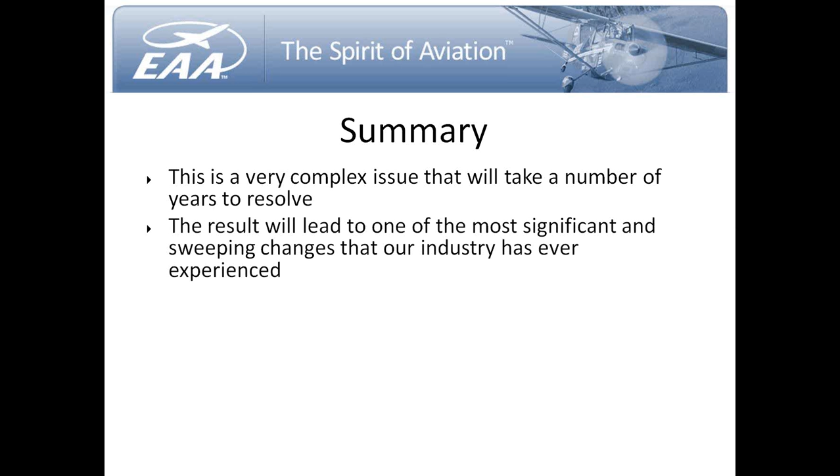Whatever the outcome, it is going to be the most significant sweeping change we have ever seen in this industry. We have never, ever tried to recertify an entire fleet to a new fuel. This is new ground. So we're learning as we go, and that's one reason it takes so long. But caution is the watchword.

In the meantime, we'll continue to press where appropriate for the availability of autogas that is not blended with ethanol. It is my sincere hope that that window of opportunity opens, whether it's with the new Congress or with changing public attitudes toward ethanol. There are some very preliminary signs of changing in thinking about these things. So we will capitalize on them where we can.

Most importantly, to you, to me, to all of us that love aviation and the EAA family, is we must have a suitable unleaded high-octane fuel that will satisfy the existing fleet before 100 low lead goes away. We have to maintain the continued availability of 100 low lead until we have a satisfactory solution. That's my job. That's what I do every day.

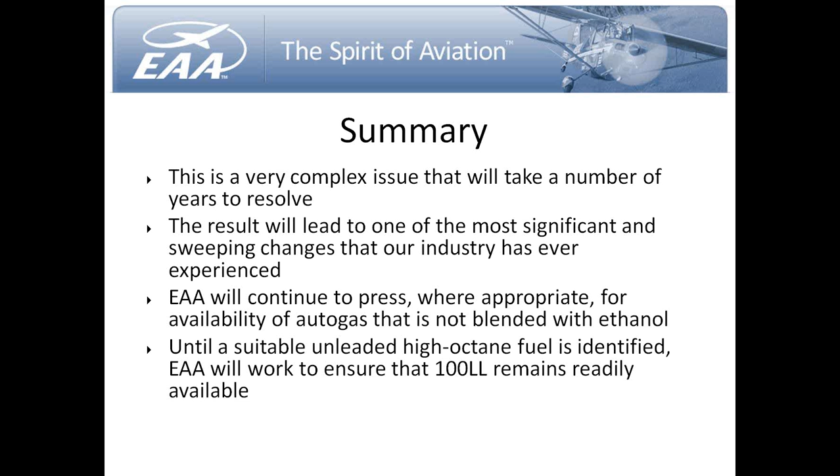And that's why we spend so much time with people like the EPA and Congress. FAA gets it. They get it from a technical standpoint. But we have to manage these outside influences, and that's what you folks pay us in Oshkosh and here in Washington to do for you. So I want to thank you very, very much for your attention. I know this has been a bit of a trek, and we've really just glossed over the surface of it.

If you have any additional comments you'd like to submit, please do so. If we don't get them covered in the Q&A session that follows here, you're welcome to send them to my attention at thegovernment@eaa.org. I would only ask, please, don't expect a reply from me. I just don't have the capacity to respond to everybody. But please know that I do read all of your letters and emails and discussion threads on Oshkosh 365, and I absolutely take everything you say and feel into consideration, as we all do at EAA. So please don't be bashful, and as I know you're not, in sending your comments, and please rest assured that they will be absolutely considered.